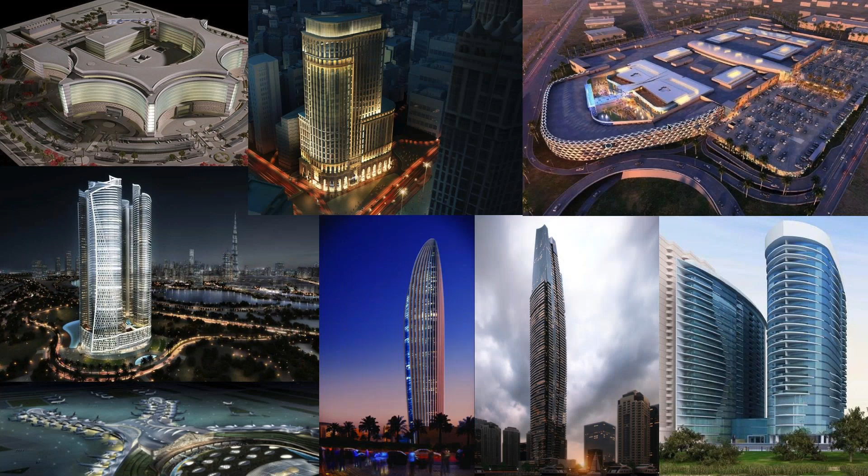As you know, us as a company, BIM Engineering Solutions, we are dedicated to BIM. We're also the distributors of ArchiCAD in the region. We do services and training and software, and we are based in basically 3 offices, 1 here in Dubai and 2 in Egypt, and we work with resellers in the region. With services, we basically work with developers, with contractors, and we do projects. These are some of the projects that we worked on as BIM service providers.

That includes usually, and mostly in ArchiCAD, architecture, structure, MEP, and ArchiCAD proves every time that it's really good for larger projects because it doesn't affect the speed. We can still manage these projects that you're seeing in maybe one file that we can run on a normal computer. So that is also one of the most powerful things about ArchiCAD.

This is another example of a mall. You see structure, MEP, and architecture. I usually like to show this example because many people think with ArchiCAD you can just manage to do architecture and structure, but you can actually do everything with ArchiCAD. So that's an example of a large project with MEP and so on.

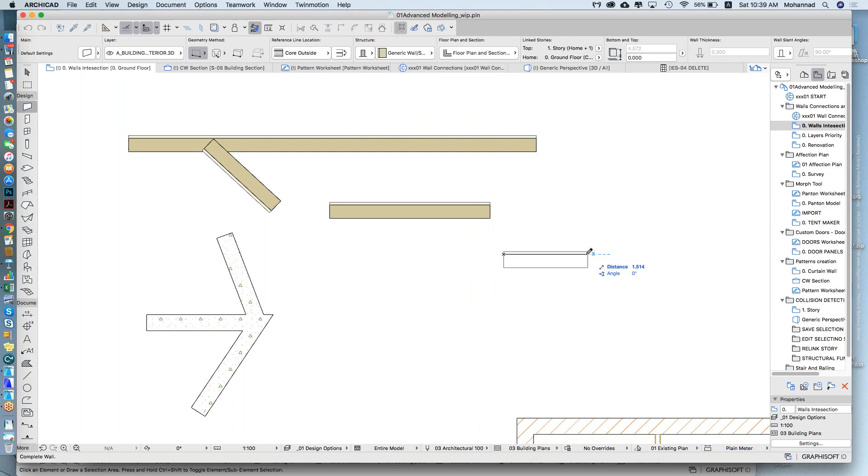So you can see that when I drew this, the reference line is actually at the outside surface of the core. But let's say if I draw another one, and in this case I would say center. So the center of the whole wall. Yeah, so it's actually drawing that at the center, or the inside face. So I can draw one inside face. And you see, after I draw them, they still have their reference line very clear, and that's how it interacts, and so on.

So if we look at this, for example, the reason this is not cleaning up is they're not basically connected. So let's say if I drag a copy here, and drag this here, you'll see that it cleans up. Now, one thing that is helpful, if you want to see them always, you can just go to View, On-Screen Options, and turn on the wall and beam reference lines. So you'll be able to see them and understand what's happening. These lines will not be printed. It's just on your screen. Yeah, so it helps understand.

One thing about editing also, before we carry on with the other parts of the walls. So let's say I have a wall, let's say it's a curved wall, doesn't matter now where the reference line is located, but let's say we have different walls. So let's say that's one, it's another one, whatever. One thing when you're editing is helpful: if you hold Command, or Control on Windows, you can start trimming the walls. So if you want to trim, just hold Control, you'll have this icon and just click.

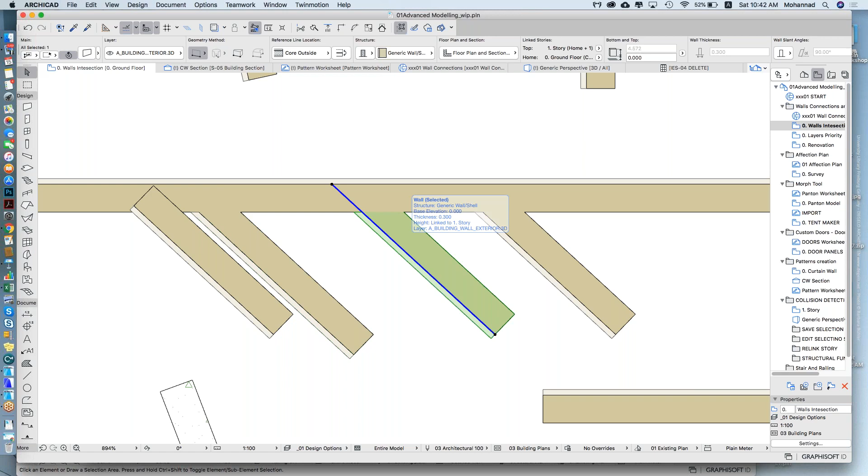For that, in Edit, you have something called Reference Line and Plane, and there is Modify Wall Reference Line. If I click on this, it will give me options to edit that, basically keeping the wall in place, or walls in this case. So for example, if I say I want the reference line to be in the center, or the inside face, or core, or whatever. So let's say center, you would notice that the lines shift. The wall is in the same position, it's just the reference line that shifts. And that is helpful when you're editing: if you have zones linked to it and you want to edit without moving it, you can use this.

Another thing about intersections. Let's say you see these three walls intersecting at the same point, and you notice that maybe this is not the intersection that you want. You want priority for this intersection over the three. You can control that. For example, if I select these two and go to settings, you will find under Model there's a Junction Order. The higher the order, the higher priority the connection has. So if I change the order of these two to, let's say, 10, you'll see that now the connection is changed, giving this intersection priority. Or if I select these two and do the same, these will have priority over the connection. So you can do this.

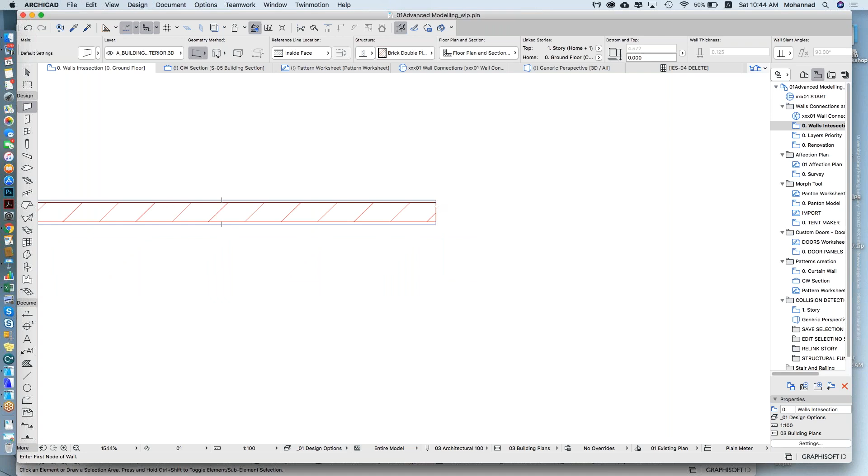Another small thing about walls, let's pick another wall type. Let's say this, a wall with plaster or something. I hope you know that if we're placing a window or a door, we can make these wrap, we can control the plasters. This is more for the documentation workshop, I'll show it more maybe in documentation. But if we have windows, we can control what elements are wrapped and the wall behavior. But usually I find users get a bit confused when we don't have anything. So we want it to end here, but we want the plaster to wrap.

There's a tool called Wall End Tool. You can just select it, and the default. So for example, if I select the wrapped end and just click it here, it will provide it, and you have options for the thickness of it and so on, and you can control it. And this tool is not only for wrapping, you can really do a lot with it.

So let's say if I draw another wall that has more like composite, smaller skins, and if I use the wall end tool and I use the returned end, here I can actually control how many skins to turn. So I just want 2. You can look at it here. So just 2 turns and so on. So we can actually control a lot of it. So it's also a helpful tool when it comes to walls.

Another thing that we face quite often is when we have hidden elements, but they're still affecting the plan. So this could be if we're doing options, if we're doing structural and architecture. So as an example, we have here 2 design options. So this is one, the small one, and then the second one is the large one. And I placed them in different layers. So I have option 1, option 2.

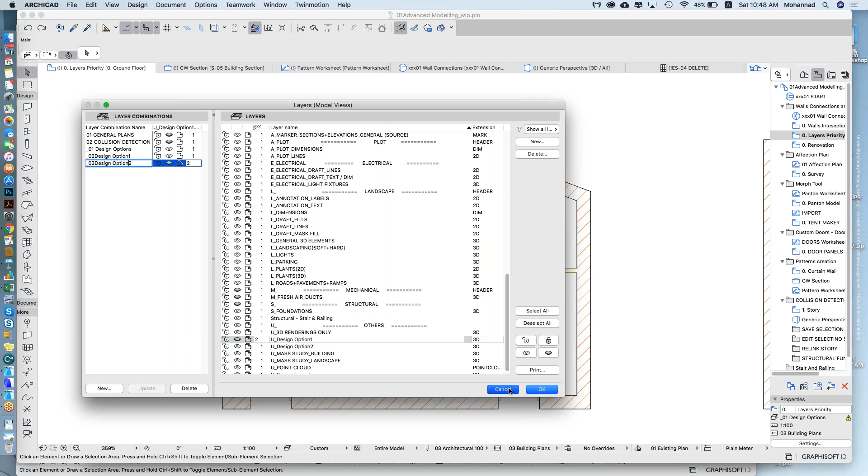So for example, I have 2 layer combinations here. So in this one, you can see that the number for option 2 is 2, and this is 1, and 1 is hidden and 1 is shown, while the other one flips it. So these are changing with the layer combination. So I can basically just go and select option 1, and then select option 2, and that works without any issues.

Another similar way of managing things, more focused on renovation, but you can also use it for design options: in ArchiCAD, by default, every element, when you open it under the renovation classification, has a status. So it's either existing, to be demolished, or new. You can also view them. There's a dedicated palette. You can open renovation here. So I can select any element and say, this is existing, this is to be demolished, for example.

Now, based on the status of the elements, we can use the renovation filters here. So what I'm looking at is the existing plan, which is usually existing elements and elements to be demolished. But then, for example, if I go to demolition plan, it will highlight the elements that are going to be demolished in a different color. You can see them.

And then if I switch to after demolition, basically the demolished elements will be gone. And then if we go to new construction, it will highlight all the activities, the new elements and the demolished elements. And then we can just go to planned status, which is basically the end game. So basically I can switch between what is existing and what is planned, and that doesn't interfere with your layer setup.

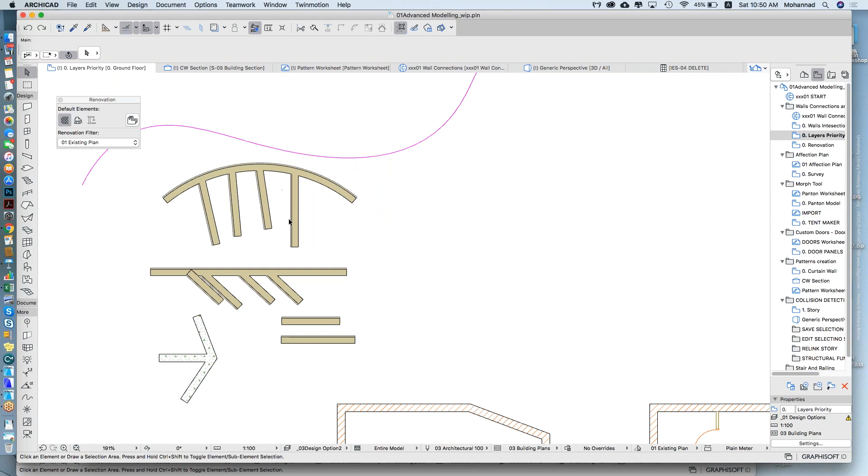Editing reference line, it's also there. Ah, you mean if we want to move the reference? Yeah, it's an edit reference line, and you have modify wall reference line. And one thing to note is that actually ArchiCAD understands the elements, right? So it understands what is core and what is finish. So when we are selecting, we can select that the reference line is just at the face of the core or face of the finish and so on. So we can do that too.

All right. The second topic that I will cover is dealing with affection plans. So we usually get the affection plans, and we have the coordinates of these points, and usually we draw them. So I'll show you a couple of ways of doing that, and maybe a more automated way. Because we are facing two issues: first of all, drawing it, and then that we want it to be at the zero of the project. We don't want it to be at those very far coordinates. So we'll see how we deal with this.

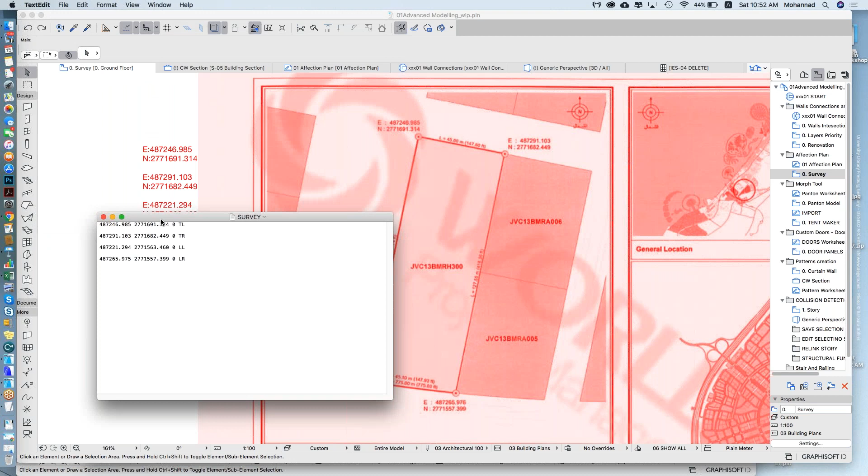So I'll start here, and say we have these points. I took the points from here and just wrote them here so I can see them. And as another example, say these are the same points, but we can start by typing them. I would suggest that we start with something basic like using the hotspot tool. The good thing about hotspot is that it's visible no matter how you zoom in or out, so you can always see it.

So we can start by typing this information in. Basically, I'm not moving anywhere. I'm just hitting X and start entering the east value. So for the first point, it's 487246.985. And then for Y, which you can hit Y or tab, that is 2771691.314. And once I'm done, I just hit enter. And we can check that point. If I zoom to fit, you can see it's very, very far, but that's fine. We will deal with that later. So that's the first point.

Then I'll enter the second point, again X 487291.103. I hope I don't miss something here. 2771682.449. So that is the second point. The third point is X 487221.294, and then 2771563.449, and then the last one is X

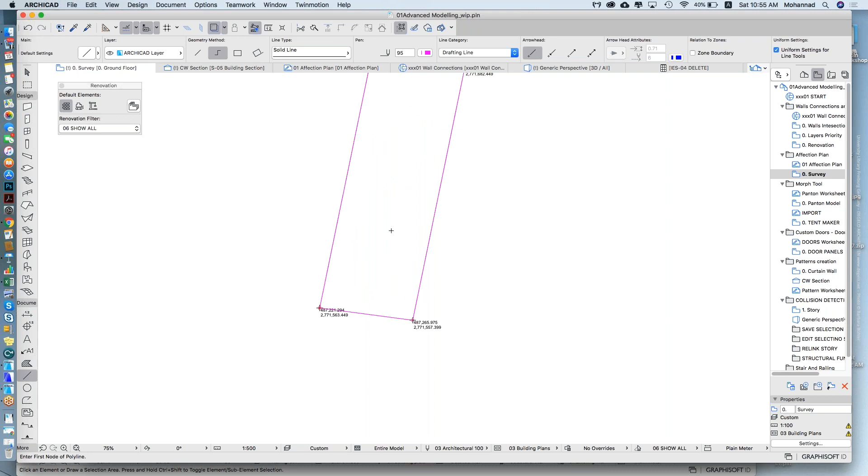One thing, because it might get confusing to know where to drag it, I usually do this. While I'm here, I pick the line tool, and again, I just enter X0, Y0, enter, and that will give me a line that's actually stretching from the origin to here. So it will be very easy to track. I can just select these here and drag them. And when I'm zooming out, it's very easy to find. That's really far. Okay, very easy to find where 0, 0 is.

So let's say I place this here. Okay, now let's delete this line. Now the problem that you face is that it is reading the actual coordinate because we moved them. So what we can do, we can delete them or keep them, it doesn't matter, but let's delete those coordinates. Now we know one thing for a fact, that we moved. Sorry, I closed the file.

So we know that we moved whatever shape we drew by this value, because this is the lower left point. So it was 4, 8, 7, whatever, and we moved the whole thing by this on the X axis, and this on the Y. So basically, we can say, take the readings and subtract this out of it. We're just telling ArchiCAD to measure whatever we have here, but consider that we moved it from that point. So what I can do is select this point here,

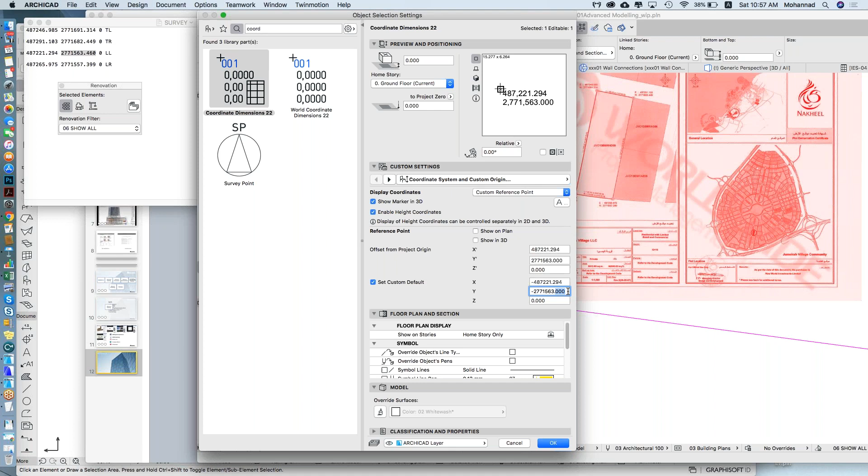Sorry, 63.460. So now this should read this value, and based on the amount that we shifted, we can start placing it on the other point, and it should read there. So this is the lower right point. I think I missed some point here, but I guess you get the concept that basically it's moving the whole thing by that value, and that reads correct. So that is one way.

Another way, yes. Why would you want to move it back to 0, 0 if it's already placed with the correct coordinates? Because actually it's an issue with all CAD software. When you place something very, very far from the origin, you would expect some issues. It could be elements not aligning, it could be a texture. So I wouldn't recommend that you place it there.

Because I would think if you're placing it with the correct coordinates, you can do things like global illumination and whatnot. You can do this too, because you can set the 0, 0 of the project to some coordinates. So for your 0, 0, you can say it's this city, these coordinates, and that is fine. But it's not recommended from the technical point of view to have something that far from the file origin.

The other way that I want to show you, so I'll just delete this. Now you see we have these points, right? We have to rotate it to have a 90-degree plot. No. Once you drag, you're just moving it on X and Y. The rotation has nothing to do with it, because you're rotating the whole measurement. But if you move it to 0, 0, then you need this part to be rotated and still have the correct coordinates in order to have a clear plot.

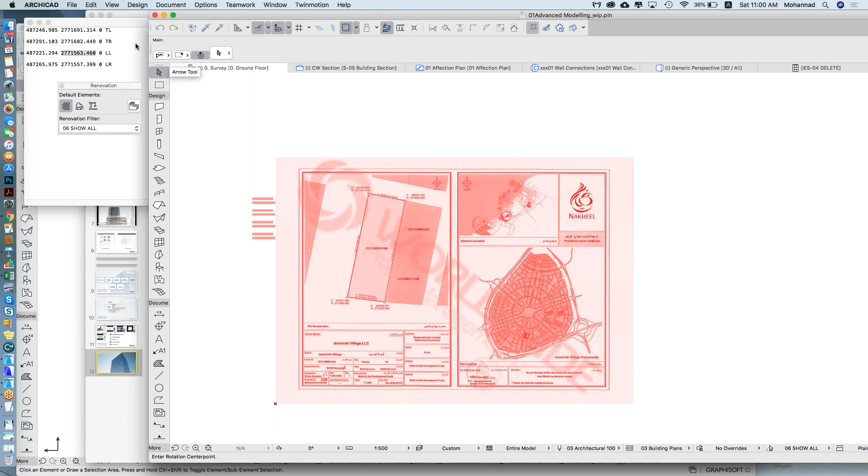But the other thing that you can use, because for example, when I did it, I think I mistyped a number, that's why we had a difference. So to eliminate that, you could use this method. Basically, open a TXT file and enter your points one by one: X space Y space Z. If you have Z, you can enter it also. And if you want a description for the point, you can also enter it, but it's not necessary. The most important is X space Y, then Z if you have it.

So you enter these points line by line, and then basically that's a normal TXT file. And then in ArchiCAD, I can just go to the option where it says place mesh from survey data. Now this is mainly used if you have information from a Total Station. They give you a file that has X, Y, and Z. You can use it, but we can also use it for these things to eliminate the risk of typing and then mistyping something.

So I can just go to this option that says place mesh from survey data, and I'll pick this TXT file. And then I select, for example, I want it to be placed in the original location, and I want to zoom to that new mesh, and that's it. That is actually created directly. So it just reads the points, creates the mesh, and places it. That is in the very far point that we're working on. And we can use this again, coordinates.

Let's say we go back to project origin, and these are the actual points, and we do the same thing. So I actually think this is a better way than entering them manually. You just put them in a TXT file and link it. Yeah, normal TXT, just open and edit. I think in Windows it's a TXT editor or something. You just open TXT, Notepad, exactly.

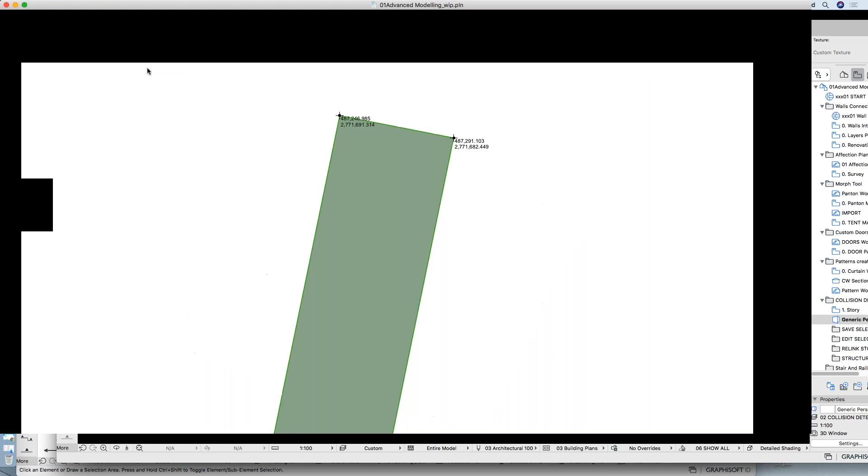So this is about surveys, how we place them, or plots, how we place them, how we drag them, and then we're still able to read the correct values even if they're not in that location. Are we okay?

Yeah, you draw that coordinate in the document, and then you can attach it to a place so that the coordinate is preserved. You're not moving it, but then the problem is if you're adding other points. And actually, not only that, it's when you place other points and you want to mark them up. So you want to mark up a point that is in your design with that value. You don't want it to be from 0, 0. So it's better actually to use this method.

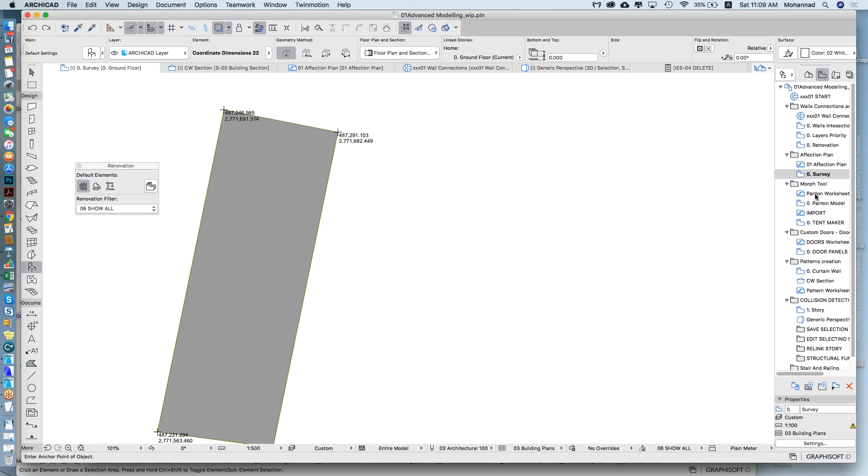Okay. We will talk now about using the Morph tool and some other general modeling tasks. We will start with using the Morph tool to create, let's say, something like furniture. The point is not about actually creating furniture. I just want to show you that you can do a lot with the Morph tool, that you can model freely. So I'll show you a few examples. One of them will be creating this Panton chair.

So I will do that using the Morph tool. I had a basic section, we will see it in a second. So I'll just pick the Morph tool here, and using Magic Wand, I will apply it here. And let's say I'll change the material to this red color. And I will just place this here, and let's have a look at it in 3D.

So I have this as a section, and using Morph I also drew a basic elevation of that chair. We will start with that. Let's say I'll place it maybe 1 centimeter below. And then clicking here, I will have the options. One of them is called tube, which allows me to go on a specific path. So I'll just follow the path of, sorry?

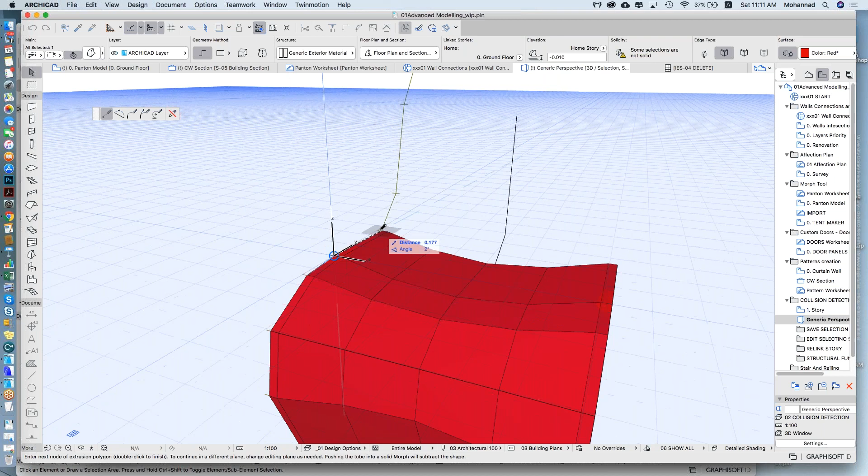Nah, it's a line. You can draw it in elevation. That's fine. But again, mainly what I'm trying to show is what options do you have with Morph? So I hope that is clear. Yeah, as you said, it's just something you draw in section maybe, or so on.

So let's say we started with the basic shape. And one thing about morphs is if I select, now it selects the whole morph, not the sub-elements. But let's say I want to select sub-elements. You always have this white arrow that allows us to select sub-elements, or it's Shift+Control, actually in both Mac or Windows. So let's say the points should be entirely in.

So I'll select these points here, and let's say I'll drag these points back. So using move command or drag, let's say I will align it with this point here. And again, we want to select these points here. So using the same thing, I'll just select poly selection, holding Control and Shift. Let's say we select these here.

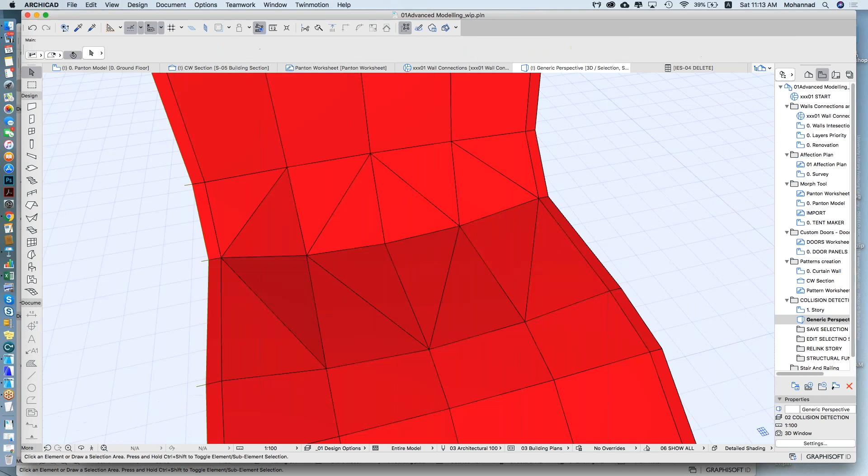And let's say we move it. Looks like I've selected an additional point, so let's remove that. And again, we drag it. Let's say I have a reference point here, so I'll just put it here. And again here, using the same thing, I'm holding down Control and Shift. So using that, drag it again. Let's say we align it here, and we'll do maybe the same to enhance it a little bit here, or actually the top one.

So basically what I'm trying to share here is that you can work with these sub-elements, which gives us quite freedom when we're working, and gives us different results. I'm not really very accurate on this. I'm just creating it as an example. So something like this. And then maybe the last selection is these points here. And I'm always keeping Shift and Control pressed, because I just want these sub-elements to be selected. So something like this.

You can also select surfaces. So in this case, I'll select this surface here, and then push them or drag them a little bit. And let's also select these. I think it's a bit thick, so let's select these edges, and also these. So always holding Shift and Control allows me to select only surfaces, not the whole thing. So we select these, and let's push it up a bit, so we make it a bit thinner.

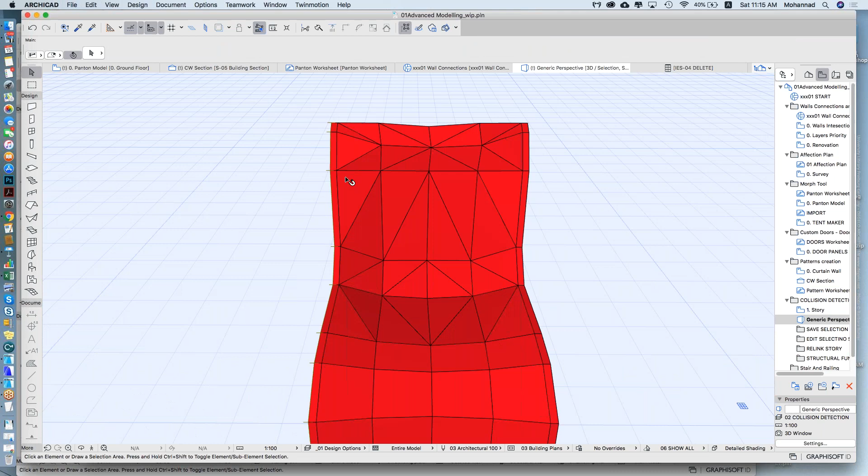Another thing that we can do, which I think is also cool, is if I select this whole row here. Selecting this, the morph allows us to go with this option. There is something called box stretch, and this allows us to work with these elements as one box. So I want to push from both sides, let's say I want this to be narrower here. So both of them go narrow. And let's switch to axonometric view so I can see it from the side easily.

So here, we also select this option. And again, we select all these points. Looks like we missed some, so let's do it again. Again, selecting the box stretch method, and I can just push it from both sides, up to here. And then maybe finally these points. And again, we can push it from both sides.

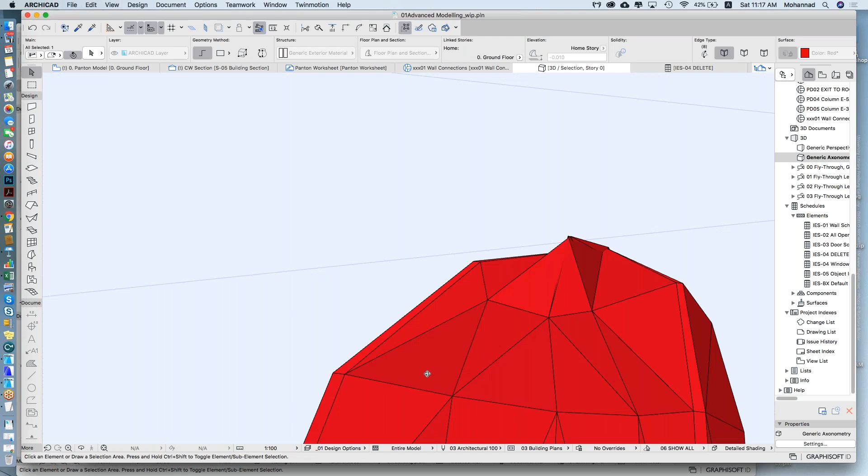And once we're done, we still have this edge that I want to adjust. I can just select this edge and pull it back if I want. I'm not going to be very accurate with it. So we can maybe just drag this back a little bit. You can still clean it up, but let's say we start with this. And then what I can do is I can select the whole morph.

Within design options, there is Modify Morph, and I can smooth that shape. So I can just go to Smooth, and smooth boundaries or keep boundaries, doesn't matter actually. And here you can control how smooth it is. Obviously, it will have more polygons, which we'll talk about in a second. But then you will have this as a shape, which is good for an object, as a chair. And now we will see how we save it as an object and how we detail that.

Because one cool thing about ArchiCAD is, so we have this. I'll drag a copy of it. So we will see how we create an object first. So we have this. I'll open it in 3D. And basically, I just have to select it and then go to File.

And then I go to Save Selection, and I'll save it as an object. Yeah, so I'll just save that as an object. Okay, and we will call it AC Panton, let's say. Now, this is saved as an object. If you want more details, you can specify what kind of object and so on, but that's fine. We'll just go with the basic saving. So we'll save an object.

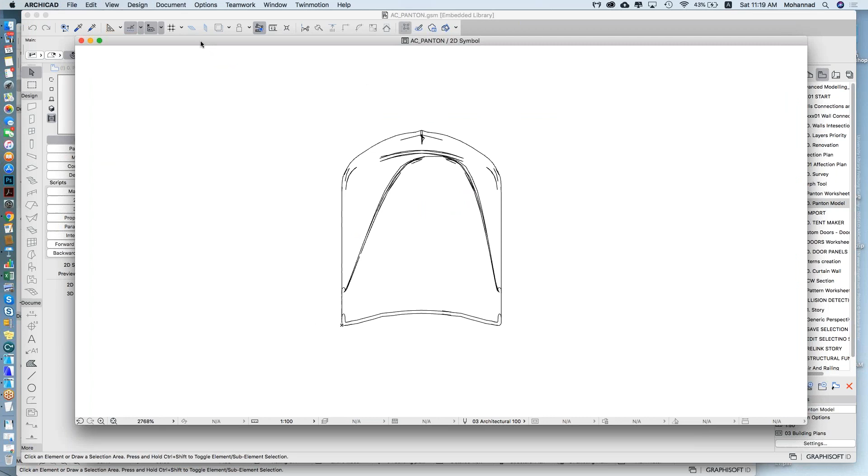So if I open that object, it will open the dialog actually of the object. So we're not going into the script or something. What we're going to focus on is the 2D symbol. So there is an option where you click on 2D symbol, and actually it will open the 2D symbol for us. And in this, we can actually start. So if I want it to be simplified, I don't want it to be exactly a projection, I can start actually drawing something here.

Let's say we just highlight the outside box of it. So we start with that, yeah. And then let's say I know that I want this to be up to here. Maybe I'll delete this and mirror. So this is pure 2D work, yeah? So we're working on it as if it's a 2D element. And then I can start adjusting it.

So I want this line to be curved here. I want these to be curved here, same as here. And then maybe I want these to have some sort of curve. And the same here. Sorry. And then maybe this line also curved a little bit. And then I want to delete the old ones. I use a different pen assignment, so it's very easy to select them. So I can just select all types using that pen.

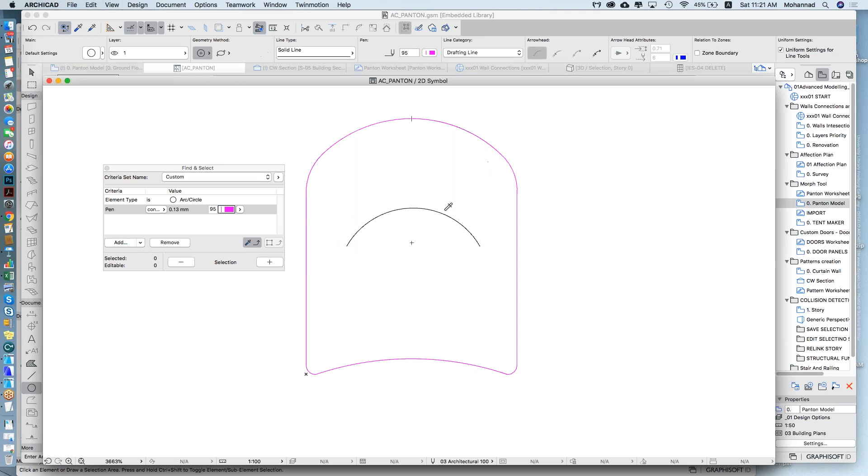So I'll select those, the old ones, and you see it has so many polygons or so many dots. So maybe you don't want that, and maybe I just want to add a symbolic line here that just shows the curve. So let's say this. And maybe I will add also a hatch. So we were able to select it like the normal object. So I'll just select a cover hatch and, let's say, background fill, and then I'll just do it like that.

The other thing that may be worth mentioning is that when I select, you see there are only 4 points to select it. So if I want more, I can go to, again, editing and use hotspots. I can put any point that I want to be considered. So let's say I want these points. I think I'm overdoing it, but just to show what options we have. So let's say these points. And so that's it. I'll just close this.

One more thing, maybe you want to add also a preview picture. So I can click on preview picture. By default, there is nothing. If you want, let's say I open this image here, copy. So I highlighted the part, copy and paste. So that will be part of my object. So now if I close the object, it'll ask me to save it, and I say yes, save it. And now I have a cool object to use that has an image and has these points and so on.

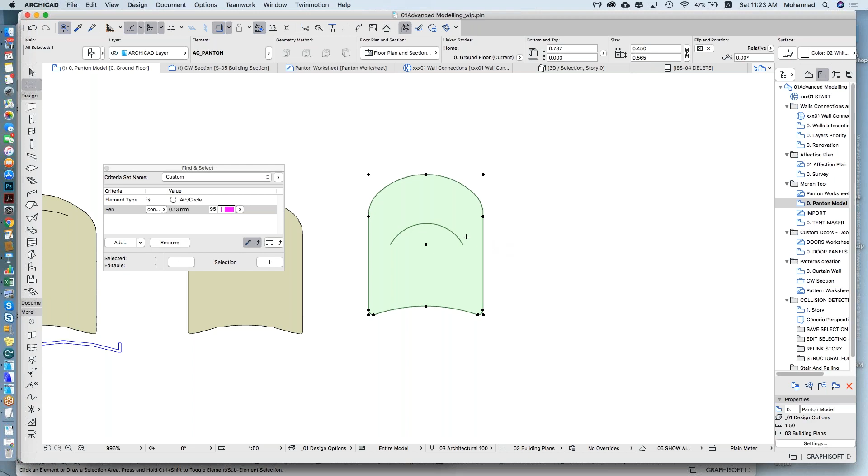Now, the other thing that I want to talk about here is importing from other formats. So actually, ArchiCAD is really, really good with importing these. So we will see the same object from different formats that I have downloaded online.

So we will start, sorry. I have them in this folder. We will start with the SketchUp. So I downloaded this, I think, from Warehouse, Google Warehouse. So with SketchUp, it's very easy. You can just drag and drop, and it will create a GDL object.

And yeah, remember one thing, that the objects that we import, we can also edit their symbols. So if you're not happy with the 2D symbol, we do the same thing that we did, or change the image or something. So that is actually the object from SketchUp. Sorry. Okay, so that is one from SketchUp.

Let's see one that is, where is it? RFA. So from Revit library, you can also do that. You need to install, I'll mention those in a second, but you can import an RFA as GDL object. So I'll just pick that and open it. And again, here you can control how smooth the geometry is. So I'll keep it at the middle.

And that will again convert it to an object. And you see that it takes time, like, I don't know, a few seconds. But once it's saved, it's a GDL object. So it doesn't matter what was the source. Once it's saved, it's saved. And then after that, here it says it's saved, and it is part of the library, so I can just place it.

So here you go. And then the last one we will try today is a 3ds file. And I found those online, by the way. It's not something that I created. For 3D Studio, you can import 3ds as GDL object. And you can import also DWG if you have a block. You can import from Rhino also. So let's save it as it is from 3ds.

But I didn't check the scale, so let's just double check the scale of this file. Okay, it's saved. Oh yeah, it's massive, so let's just make it 45 centimeters. So now we have actually chairs, same chair, from different formats. I really like this one; looks cool. So you import them, and you can enhance their 2D symbol if you want, because in many cases you import something, you're not happy with the 2D symbol, you want it simplified.

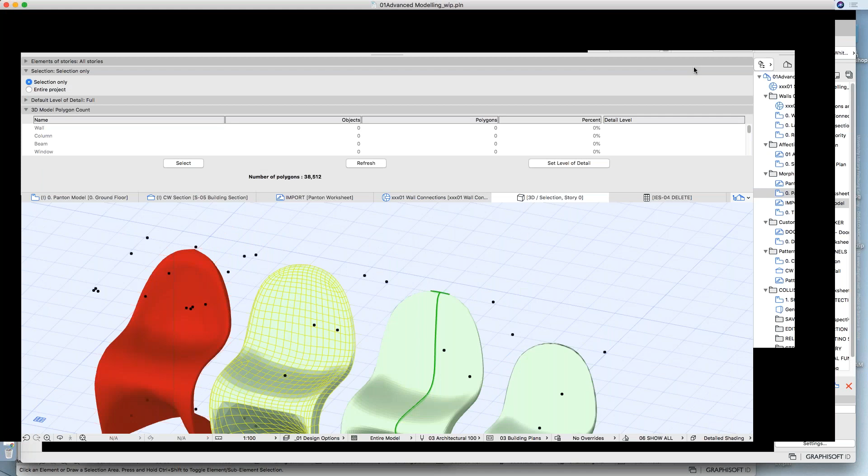So once we start it, let's say we don't want the whole entire project. I just want it for the selection. So I just want to compare these 4 objects. So I'll just refresh it. So here it says, based on the selection, 100% of them are objects. We'll see that in a second. So it shows here by polygons.

So this is the RFA one, the one that we imported from Revit. It has 23,000 polygons. It's quite high. The one that we have created is 8,000. And then the 3ds is 3,000, and the SketchUp one is almost the same. So you can see it's a huge difference between them. So you should consider this also. So let's actually run it for the whole project.

And the file has a project in it. So I'll just show you the project first. It's a demo project. Yeah, ignore this for a second. I think we have something. We still have something very far, huh?

Okay, so basically the project is this, so let's just focus on it. So this is the project, and we will run now the poly count for the entire project just to see, because it's very common. So I'll just refresh this.

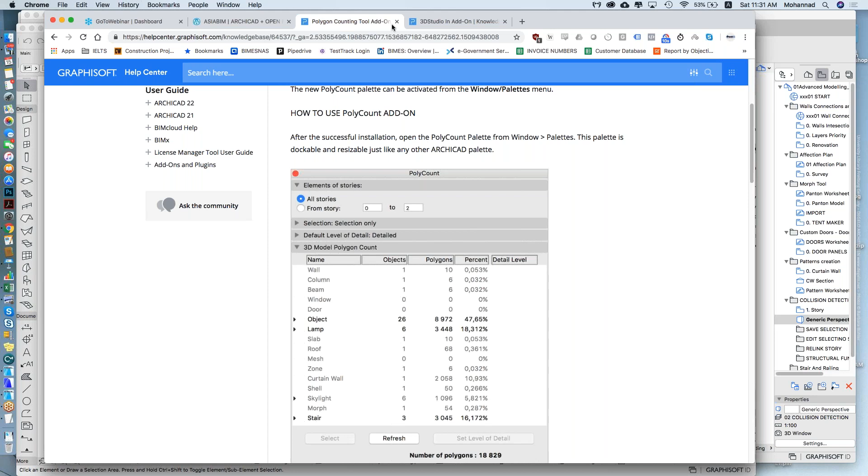You have a list of it here, so you can read about them. So for example, importing 3ds is also not there by default. So here you can read about it, how to import, what settings you can control. And we were talking about Polycount. So again, if you click on it, it explains how to install it, where to find it, how it works, and so on. And this is a free add-on, so I would encourage you definitely to download it. Let's see if it's finished. Almost finished.

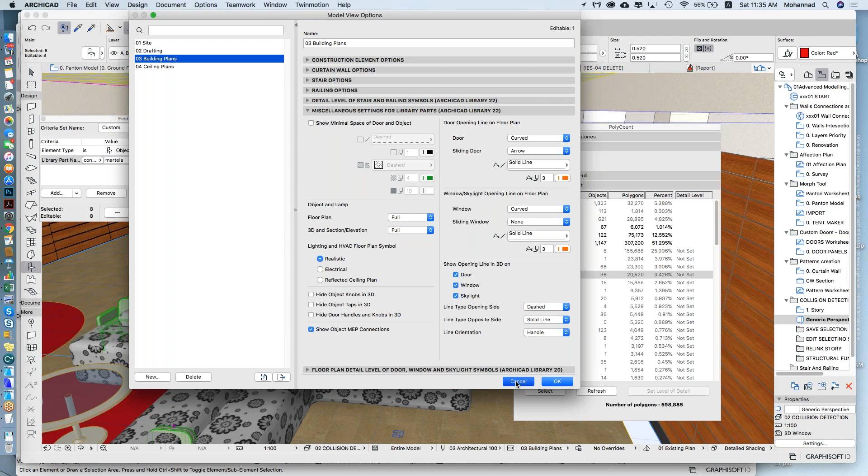I think that's it before the break. If you have any questions before we have a... yes.

The one which you used for the chair, it was in the same plane in elevation. You see, the profile was in the same plane. What if we have it in 3D? I didn't get it, sorry. The profile that you used to make the chair was in the same elevation and plane, right? It was in one plane. Right. For example, if we have the profile in a 3D plane, can we use that to produce our MEP sections? For example, we have an MEP file and a plumbing file.

We use that profile. But you use MEP actually. I mean, the MEP tools have this. But that would be faster, isn't it? If we have every single line and we connect it to a profile, generate it faster. No. But to answer your question, yes, because that is not related to one plane. You can move the lines in. And we will do a bit of it actually after this.

Or do you want to? I still actually have maybe another 10 minutes to show related to profile. Do you want to break, or should we do it and then have a long break? I don't know, which one do you want? By hands, break now or after 5-10 minutes? After. So everyone is fine with the 5 minutes. Okay, so let's show. Then maybe I can cover this, because you can do these things.

So the next point that I'll show you is again mostly working with morphs. One of the things is that in morphs we can start drawing, let's say, by lines. So let's say I'll place something basic like a line here, and I'll drag a couple of copies. Let's say this, and then I'll select these. I'll go to 3D, and using these lines, I can start editing them.

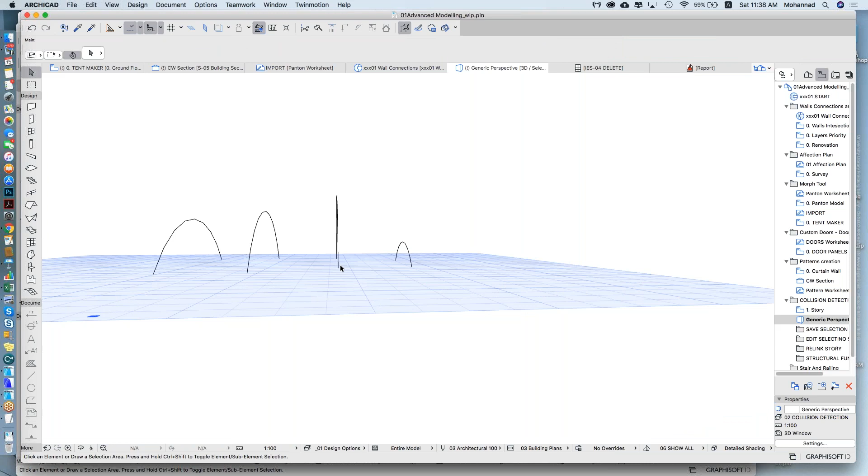And let's say I will push this in a little bit. And maybe we want to rotate this. So I can select this and select rotate. And let's say we go vertical. So let's say we want to rotate this a bit. So I think that shows that it's not one direction. And let's say we have these, and let's go back to the plan and try to connect them also with other morph lines.

So a simple one here, maybe we break it here, maybe a curve. It really doesn't matter. You can do any shape, but I'm just trying to do something very quickly. Let's say this here, and then finally this here. Let's check in 3D that they're actually connected. So here it is not. So I can select this point and just drag it up here. Same with this. Or if I want this curve also to be curved down, I can just go. So whatever I want.

Now, the cool thing is I can start selecting them. So I can select these, right click, there's a Boolean operation, and then I use union. So it will become one element. And then in Design, in Modify Morph, there is an option, Cover with Faces. So it will cover that with whatever we want.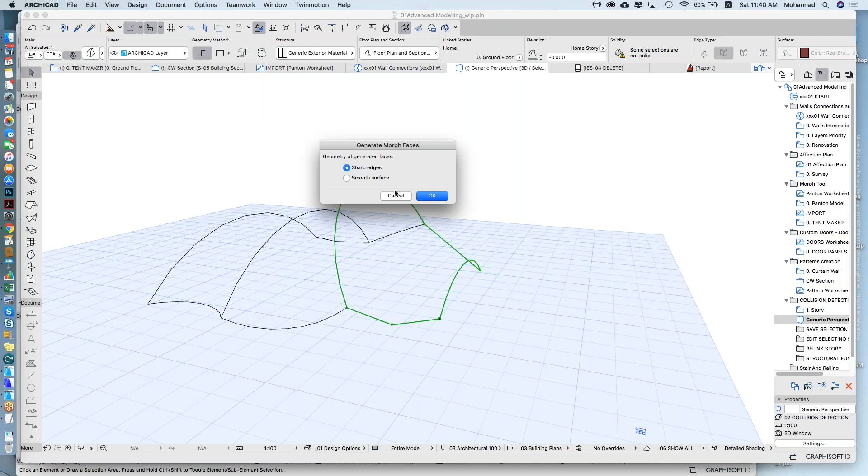And then the same. Let's say I'll carry on with this. So I'll select these here again, union, select it, Design, Cover with Faces, and so on. So you can see that you can actually do quite a lot with this. And once that is created, so again, Design, Modify Morph, Cover with Faces. Once that is created, you can convert it to one big morph.

So I can just go and union this. So it's one that you can do whatever you want to it as a morph. So I can just do some crazy irrelevant shape. And you can control how smooth that is. If you remember, we showed how we smooth it and so on. And once you have this, you can use solid element operations with other elements.

So let's assume we have this here, and let's draw maybe a wall. Let's say this is a 30 centimeter wall. Let's draw a simple one. So here, and then I'll multiply it, let's say, every 60. And then if I open this in 3D, those are really high, so I can select them all and maybe drag them a little bit.

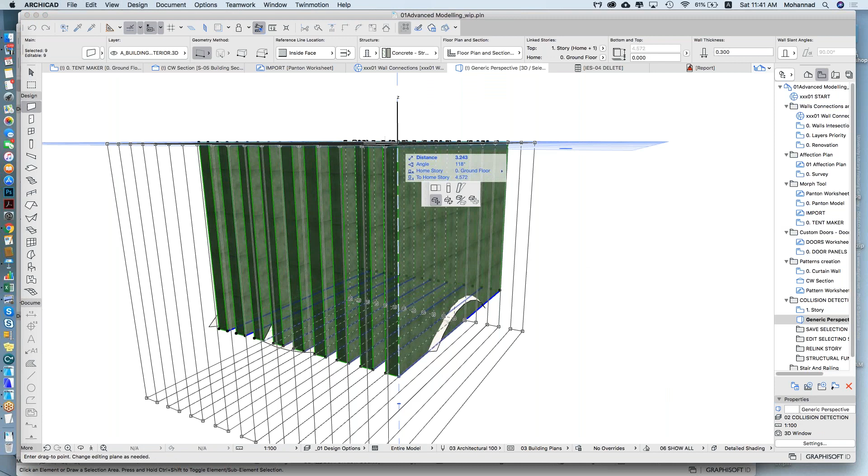Okay, and then using solid element operations, I can select all the walls and use connect solid element operations. Let's say the walls are the target in this case, and the morph is the operator. And then we'll subtract below, so we can go with down extrusion, execute, and then you can see the walls now take whatever shapes based on that.

Or we can do the other. So if we wanted this shell to be just a grid, we add elements and we subtract them from it, so we'll end up with actually just a grid.

Another really, really good object. It's a very old object. I'm not sure, maybe Georgia, Tent Maker, do you know who created it? Yeah, it's an old object that is available online, but it's a really good object for these tasks also. So it's called Tent Maker. You can just download it, just Google it. I can email it to you. It's free as far as I know. There is no limitation on using it.

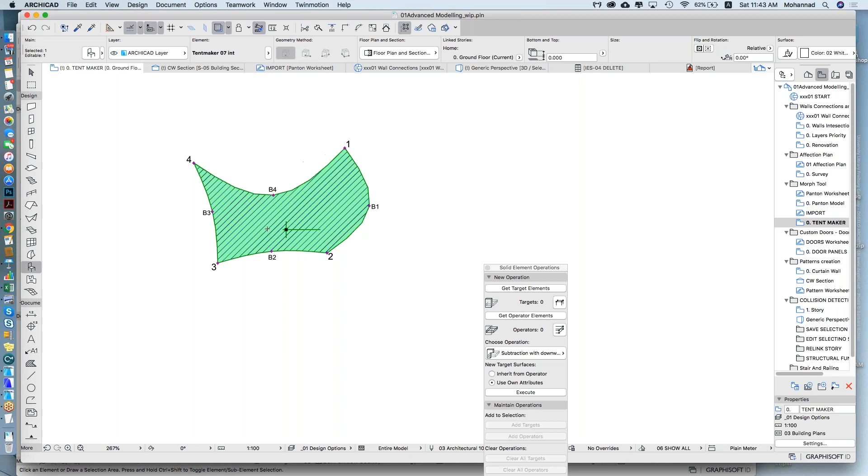And if I open this, basically with Tent Maker, I have the option to go with 3 points or 4 points. So start with 4 points. You can adjust how it looks in the plan. So let's say I want this here, I want this here, I want this curve to look like this. And then in 3D, you can start working on the points one by one. So I want to move this up a little bit. I want this here and this curve to be up.

So you can create, and you can control how smooth it is. So let's say I want it to be smoother, so I'll add points to it. Now it's quite smooth. And let's say I will add another copy of it. And this will be 3 points only, so I can just switch to 3 points. And I will match the curve in the plan.

Yeah, and then again in 3D, I can just match the points. So this is here. This is up towards here, and so on. And again, you can use solid element operations with them. I think it's a really good object when we have shapes that we just want to deal with points.

And you can turn off this marker here at the lower part. You can just say, I don't want to see the origin. And you can turn it into a morph also if you want and work on it. So I really encourage you, if you're into this kind of roofs, this is a really good object.

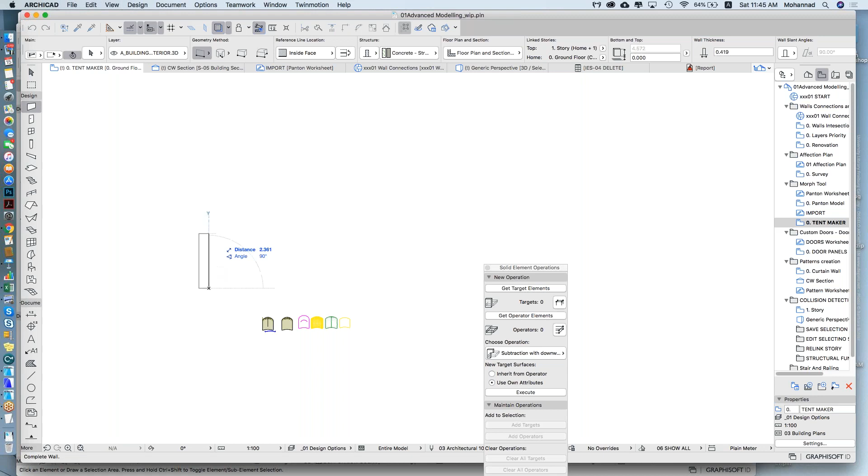The last thing I want to cover is the shell. The shell tool has some really cool features. So let's start with a basic couple of walls. I just placed those so I can use them as a reference in my 3D easily.

So just go to 3D, and then with the shell tool, there's an option called the ruled shell, and we can go to detail. This allows me to draw basically two curves or two shapes and connect them. So let's say I'll start on this surface, and I'll draw a basic curve, but it could be anything. So let's say a curve up, and then done with it, and then select the second surface.

And you can see I already have this line that allows me to draw any curve. So you see it curves the other way, and once it's done, I actually have this shell with whatever we've created, and we can still edit it, and we can assign profiles to it. And this is not only horizontal.

I mean, I can rotate this easily, so we can just go and rotate this vertical, so we can work on it as a vertical element. Or let me just show you actually if we create a closed one, let's say in the plan. So I can just go, sorry. So let's go with this on the plan actually.

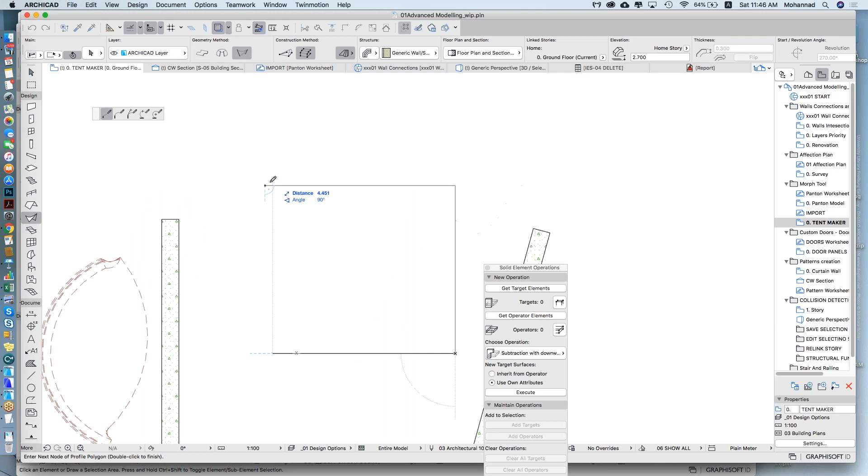So I'll draw maybe a basic box as a bottom, and then it'll ask me the height. Let's say it's 8 meters, and then I start drawing the top part. So let's say the top part is a curve, then, I don't know, straight bits. And if I select this, go to 3D, so I have the shape.

Now what I can do with it is if I click here, for example, it gives me the option to, let's say, stretch it up a little bit, or move the upper projection here, so I can just move it here. If I want to edit this, so I want this edge now to be curved.

See, whatever we do. Or I don't want it to be actually on this plane, I want it to be a little bit more rotated. So we can do this, and whatever we do here, let's just move it a little bit, and I'll change the settings of this to be projected only, and then I can actually start seeing.

So I'm moving in floors, and you see, for example, per floor how it looks and so on. So that's also a good tool when you have shapes that are not very regular. You can also utilize it. Actually, that's it for before the break. If you have any questions.

This one you have shown us is on... No, that was. Oh, it's very old, actually. Tent Maker is very old, but the shell, I think it was... No, it's very old. Shell? No, before. I think 14 or something. I cannot recall, but it's quite old. Maybe 16.

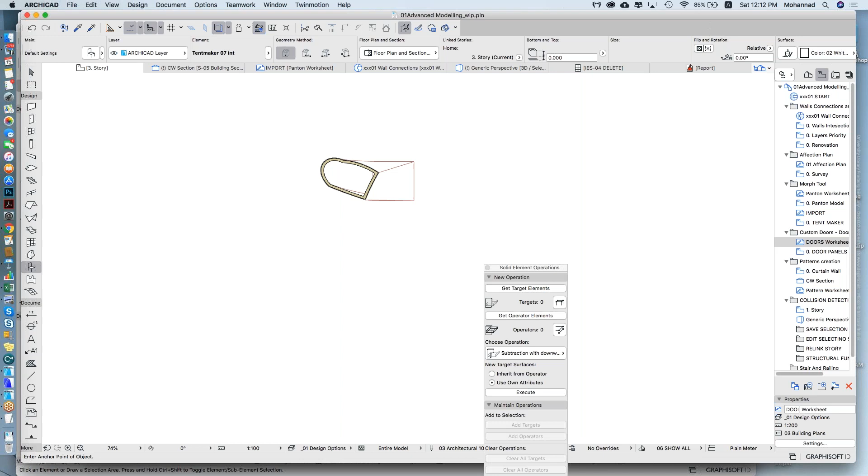Okay, so we'll start with creating custom doors and windows. The example that I will show is about doors, but that's applicable to doors, windows, curtain wall panels, all of these. Now, in many cases, people ask if they want to create custom doors. In my experience, most of the time we're talking about creating a custom panel, not a custom door. ArchiCAD comes with a very rich library, so you have many types of doors and windows that are customizable, and in most cases what we're looking at is just a panel to be applied.

So here is an example where we have different types of doors, and then we create a panel and just assign it to a door. Versus creating a custom door, which means you create a door from scratch. That's very rare unless you have a very weird shape; the vast majority of times you're just creating a custom panel. So we will cover both of these scenarios now quickly.

So let's say we want to create a custom door panel. We can start with lines. I'll just create a basic one, 90 by 2.2 meters, whatever. It will adjust to the door, so you just need a basic proportion, not necessarily the accurate one. Then we can use any tool to get the model in 3D. We can import, we can use morph, slabs.

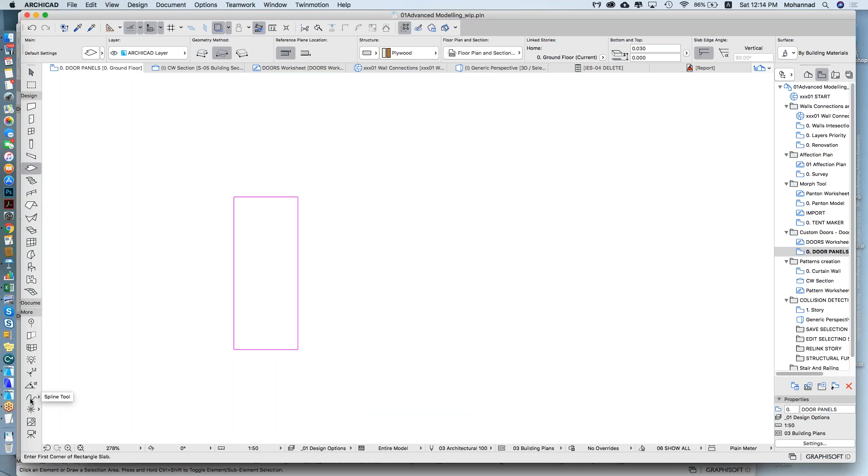For example, I'll go with a basic slab. I'll go to slabs, get a wooden slab, say 3 centimeters, and place it at 0, using the magic wand. So I have this slab here. Now let's say we also have a shaped glass opening in it that looks like this. I'll select the slab, select the slab tool, and again using the magic wand, just click, and we have that subtract.

Now one thing before we carry on: you see here the number of points. Since we were talking about polygons, this is related to the magic wand settings. You can always check the magic wand settings and control how small the divisions are when tracing. Here I'll make it a little bigger, 8. It allows a deviation from the curve of 8 millimeters or so. So you can control that.

If I create it again, you see there are fewer points. So that's something for you to know, that it also helps control polygons and all of these issues. And let's add maybe glass to it.

So let's say glass, and let's say glass is half, so 5 millimeters. And I will apply it here. So now if I check it in 3D, and let's say I'll place the glass a little bit inside, so let's say somewhere here. And again, it's not only 2D. We can have 3D elements popping out, it doesn't matter, as long as we model something in 3D.

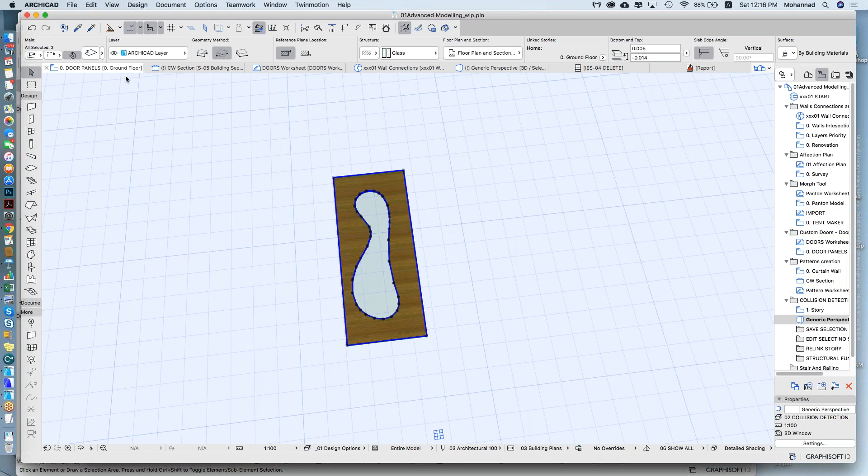Okay, now going back to the plan, we'll just place a wall. And maybe we'll place the different door types. So if I go to the standard library, let's pick different types of doors. So this is one. Let's say one with a double side, with side lights. Let's say we'll take maybe a pocket door, and maybe a folding door. So a few different types.

Now, if I go to 3D, and I hope you're all familiar with the options that we have with doors, they're very powerful in terms of what we can achieve with them. And one of the things is they're all actual interactive doors. So if this is a sliding, you slide and all of these things. But let's put them back.

Actually, if I select this now, in their settings usually there's a door leaf option. So let's say if I go to door leaf and I'll select horizontal vertical grid, you'll find that even with that you will have options. So I want this to be thicker on the lower part, I want a different number of grids. We can customize all of this. But then always we have an option that says custom.

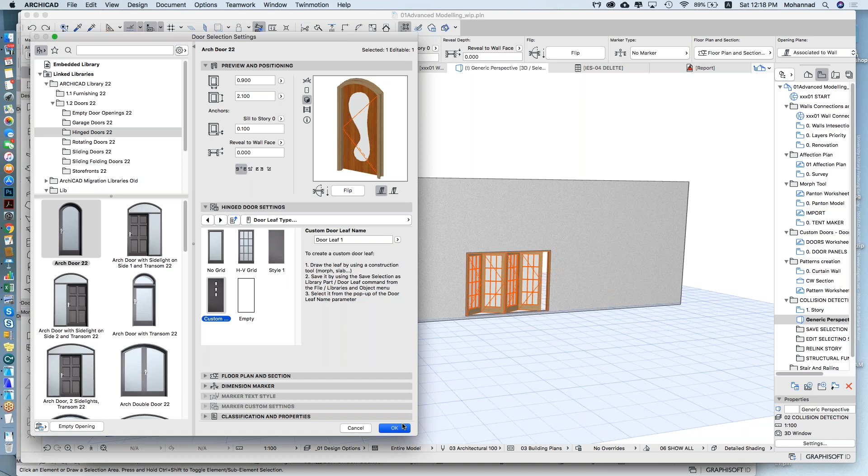So when I select custom, it will show me a list of the ones that we've saved as custom door panels. And then I can assign it to that door, and it's still a functioning door, and we can stretch it. It's just a door with whatever shape as a panel. And that applies to all door types. So I can select all of these, go to custom, select the example that we've created, and that's pretty much it.

I showed you for doors, but it works for handles, windows, curtain wall panels, kitchen cabinet doors. All of these have custom, where we can just model something, save it, and it is part of this. So we're not creating a new object from scratch. We're just enhancing what we have. So I think that's a good thing to use.

On the other hand, if we want to create a new door, let's say we have a shape of a door that is irregular, whatever shape. In that case, we need to create a new door. So let's say we will have a shape that looks like, let's say it's an opening. So this is the lower line, and then that is the opening. Now, I would hate you as an architect if you create anything like that, but let's assume that is the door.

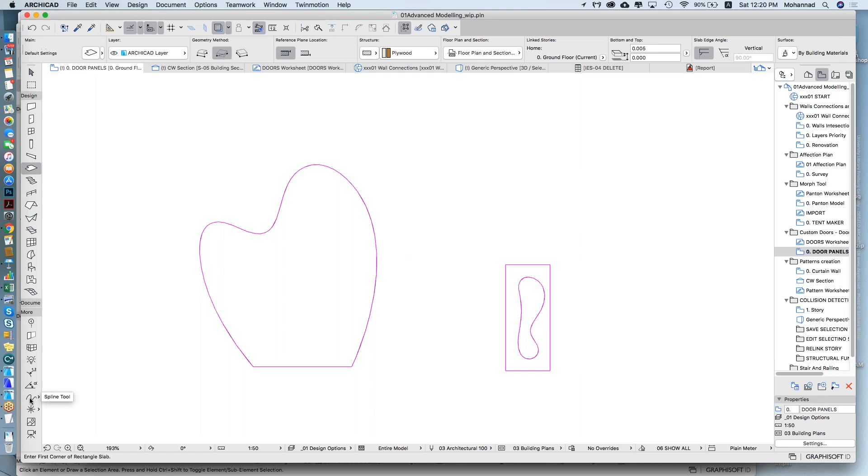Sorry. Again, slab, create this, and then let's say we place glass. So we have this. So let's say that's how the door looks like, or the opening, or whatever. Now I will save it actually with a mistake, so we can see the mistake, and then we see how to deal with it. So let's say I've created this, and then here I will save it in libraries and objects, and I'll save it as a door. So we didn't save it as a door leaf this time. It's actually a door, and we call it whatever, new door.

Okay. Now the problem with this is when we created it. So let's say we have this wall here, and let's say we pick door tool, and that is the new door that we just created. And now if we look at it in 3D, the problem is that the opening is not actually following the shape. It's like a full rectangle. So when you're creating an irregular shape, you just need to add one more step that actually tells ArchiCAD where is the boundary of the opening.

So when I've created this, basically I can just add a new slab, or any shape actually doesn't matter, but covering the outline of what I want. So now if I go here, I have added this big slab that is outlining also, and it has other parts, and it doesn't matter what material we are using.

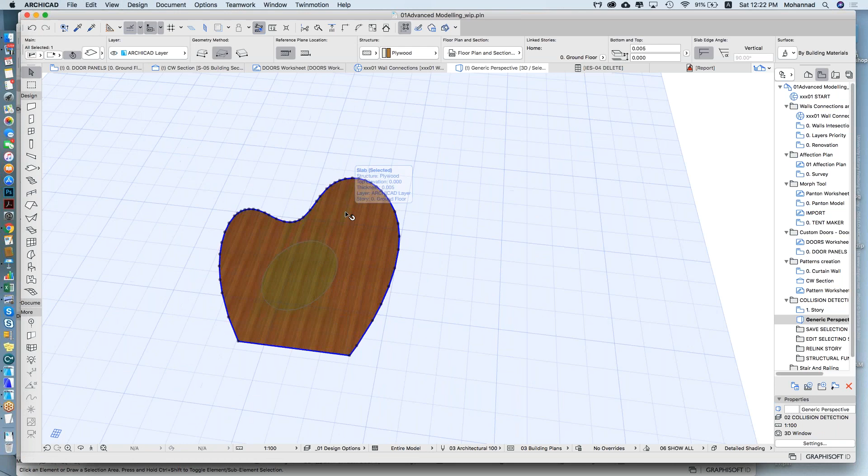The one thing that you need to know is that in the ID, for this specific slab that is outlining the shape of it, the ID of it should be wall hole. Okay, that works as a command that when we're saving it, as long as it says wall hole, it knows that when we insert it, it will follow this shape. So for example, if I just want an opening with no door, I will just add that slab and call it wall hole and then use it.

So now again, I will save it again. So file, libraries and objects, and I'll save it again as a door, and we call it door 2. And now when we place it, it should be fine. So I'll just place it next to the previous one. Sorry. So this should be fine. It cuts through the wall properly, and if we adjust it and so on, it works just fine.

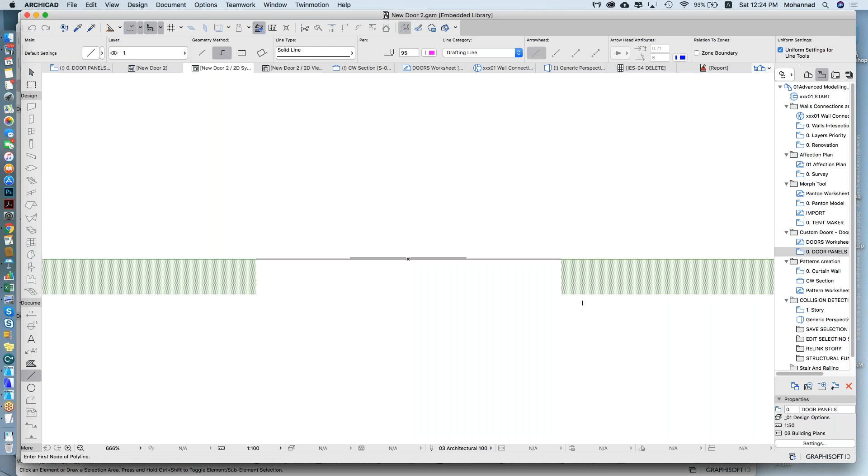Now, again, enhancing it. So let's say I'm not happy with the representation. It's an object like any other object, like what we did earlier with the object. So I can just go to opening the object here, and I can just go to 2D symbol, and basically draw. If I want it to be represented in a specific way, I'll just draw something very basic. I'll just draw a line, as if the whole thing is a door. Again, it doesn't make sense, but just for showing an example, and then I'll delete, let's say, these here.

Okay, so let's say this, or whatever you detail there, and that's pretty much it. You save it, and you have that as part of your door. And it's a door. It doesn't have all the intelligence of all the other doors, but you can have tags, you can have whatever you want. So that is mainly the difference between creating a custom panel that works for doors, windows, curtain walls, and so many other options. Everything custom you find is usually a custom panel that we apply. But then we can create also custom doors, like in this example.

I will move to another topic. So do you have any questions about this? Yes? So this custom door that we created, can it be open or just flat? No, if you want to add that sort of intelligence to it, you actually need to script it. So that's why I encourage you in these cases to think of actually using the standard doors, because standard doors have a lot of options that you can customize to reach a combination.

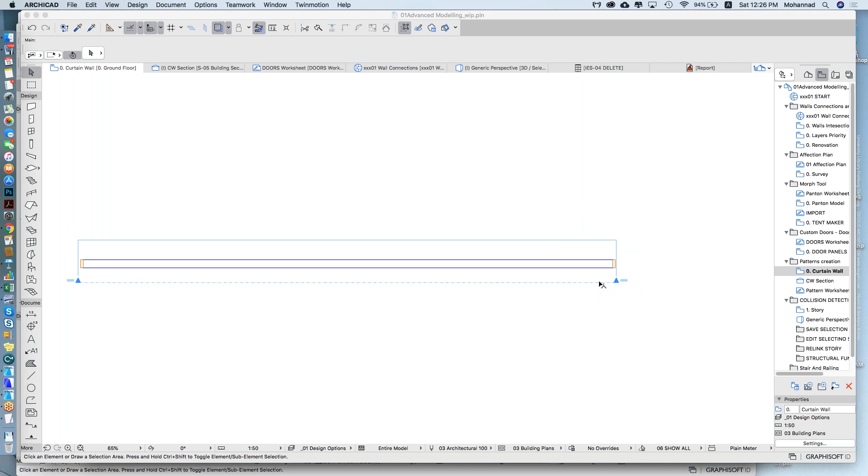So what I have is an empty curtain wall, and I have this as just a trace reference. And I can start with edit. I can start applying the frames. So I'll just start with this here. Let's say we created this, and I'll select these frames and then rotate them. So just say rotate, and let's say we will have 11 copies, because I know this has 12.

Okay, so you have these frames. Then let's just add, I think we can just do half of it. So I'm just adding these frames. I'm tracing, drawing, and obviously for that you need to have a tileable pattern that could be repeated, yeah? So you always look at that pattern when you're creating it. That's something that could be repeated.

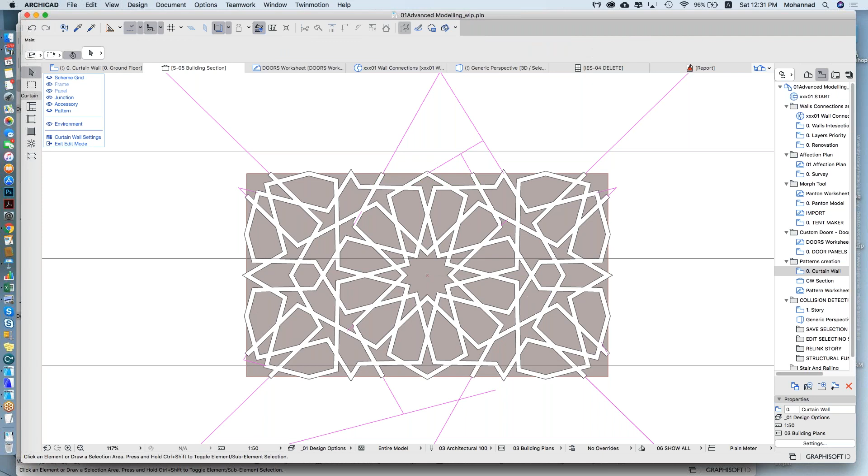And we'll turn off this, or we can keep it. And you know, in 22, we have this option that we can look at the pattern, and we can start adjusting the pattern edges. So I can just say this is up to here, and the pattern should be again here, and then from top, and you can see feedback of what you're doing. And then apply. Now obviously creating it with curtain wall has so many advantages because we can apply windows and different panels and so on to it.

So if I go to 3D, I'll have this, and then if I want to change something in the settings, I want this to be a window or glass or something, we can do this. But this has so many polygons. Now, in many cases, if it's just a decoration, just a screen, maybe you don't want to create a 3D object out of it, but you want it to look fine in 3D and in elevations, but you don't want to do the whole thing. So this is the first option that we talked about.

Now, the second option is actually using images. So for that, we will use this image, for example. Basically we have to utilize something called the alpha channel. In images, we have channels. We have for colors, RGB, and then there is an alpha channel, which allows the computer to know which parts to be transparent and which part to be solid. So I'll show you that. I'll switch to Photoshop, just to show you how to prepare that image.

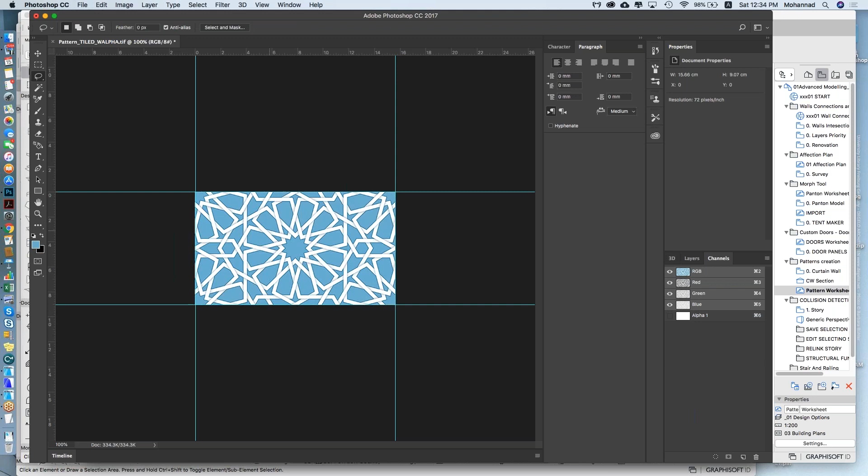Basically, the alpha channel has black and white. Whatever is black will be transparent, and whatever is white will be basically solid. So here I'm working on the alpha channel. I'll paint it all white, and then I'll turn on the other channels, and basically what I will do is select the areas where I want it to be transparent. So I'll just say by color range, select the blue. You can be very accurate about it, but I'm just showing a quick example.

And now in the alpha channel, these parts should be black, which means that these parts will be transparent in that image. So the image will be this, but everything in the alpha channel that is black will be transparent. So that's the image, and I will save it.

You need to save it in a format that actually carries the alpha channels. So for example, in this case, TIF or TIFF. PNG carries it. I think we have TIFF and PNG and PSD. As long as ArchiCAD reads it and has alpha channels, we're okay. So I'll just go with that. So delete 3, let's say.

And now in ArchiCAD, and by the way, that's very common in images. It's not like you always have to create it. It's very common when you're downloading textures that they actually have alpha channels. So now we go to surfaces. Let's say I have this material here, and I'll create a new one. I'll just call it delete 1 or something.

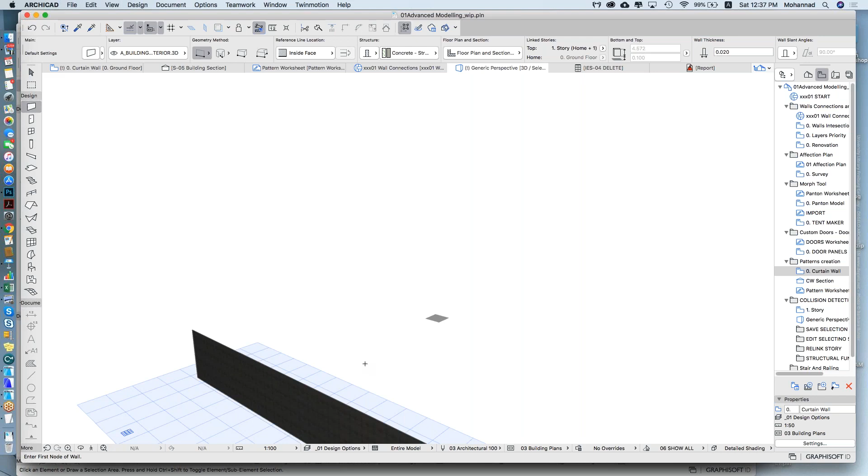So that is a texture that we call delete 1. We can give it a color if you want that reflects something, let's say blue. And now, basically, if I draw a wall that is very thin, 2 centimeters or something, for this wall I will use this surface. So I'll surface override and use delete.

And now you can see that this actually has the pattern, and it's just an image. So in this case, this will be just 6 polygons. That is just a wall, but this is just a texture applied to it with transparency. So you don't need to model it. Now, if it's an important part of your design that you need to model and document, then it's fine. But if it's just a screen or this kind of thing, you can use it.

Now, we will just carry on and enhance a few things about it. So first of all, we have this. But now, for example, if I draw an elevation here, and let's say I'll have another wall here, and this wall will have a different material, let's say this. Now, if I open this elevation, let's hide this. And in the settings of this elevation, or section in this case,

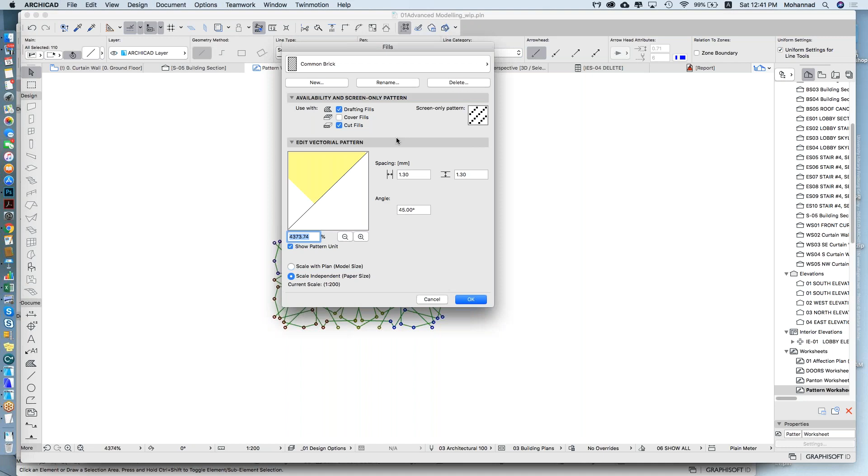Okay, in element attributes, we just go to fills, and I'll create a new fill. So maybe I'll pick one of the symbol fills, any, it doesn't matter really. Let's say this, and I will duplicate it, and I'll call it, again, let's call it delete 1 or something. And here, basically, I'll just paste that pattern. So now I have just created a new fill based on this pattern, and I'll just say OK.

So first of all, before we carry on, I just want to show you that now it's a new fill called delete that will have that pattern. And I can now assign it to a surface. So I can go here, instead of having no hatch, I'll say assign this hatch to it. So now I know that I have this texture in 3D, and also in a section or elevation I'll be able to see that as part of it.

So imagine if I have to model this in 3D, how many hundreds of thousands of polygons, and now it's just 6 polygons. And the last thing you might consider is that you might need to move this pattern or realign it. For that, you can always use the option, sorry, I forgot where it is. It's Align 3D Texture, in Document, Creative Imaging, Align 3D Texture. And then if I click Set Origin, wherever I click, that point will be the origin of this pattern, and that affects 2D and 3D.

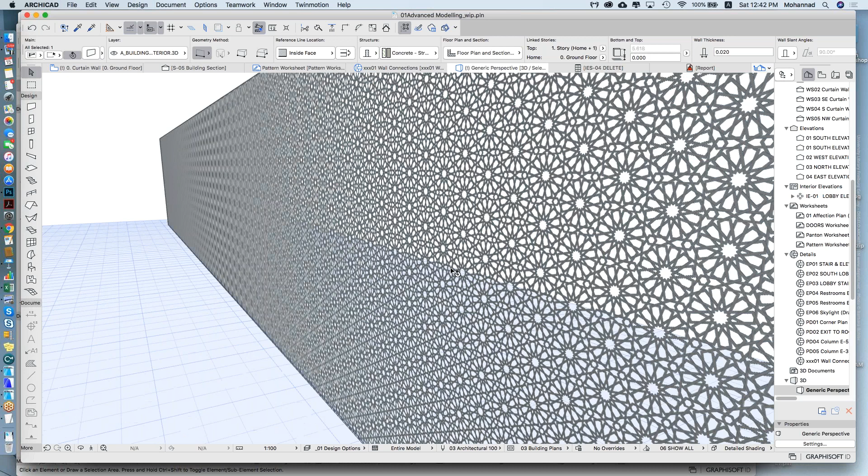So I think this is a good tool, especially for these examples where it's just the shape and you don't want to overdo it. It does actually. It reads the transparency, yes. Let's try it actually, it's a good question. In rendering, definitely it works, I'm sure of that, but I was just checking 3D. Apparently it doesn't. Rendering definitely works, that's out of question, but if it's not working here, it will not do that.

But since you mentioned 3D, one thing to consider in the surfaces: we created this material and edited it in OpenGL and so on, but now if I render it, it will still read the old values. So before rendering, when you switch to CineRender by Maxon, you have an option that says update from basic. That will carry over the same settings, and then you can have shadows and all of that.

It's a wall. There's no parts of it. It's just a wall, and that's why I'm not saying that you need to use this everywhere, but when it's not about the detail, it's a very simple thing, like a screening on a facade or a handrail. It's just a pattern that you don't need to include in your design, but you want it to show properly, so maybe you can use that.

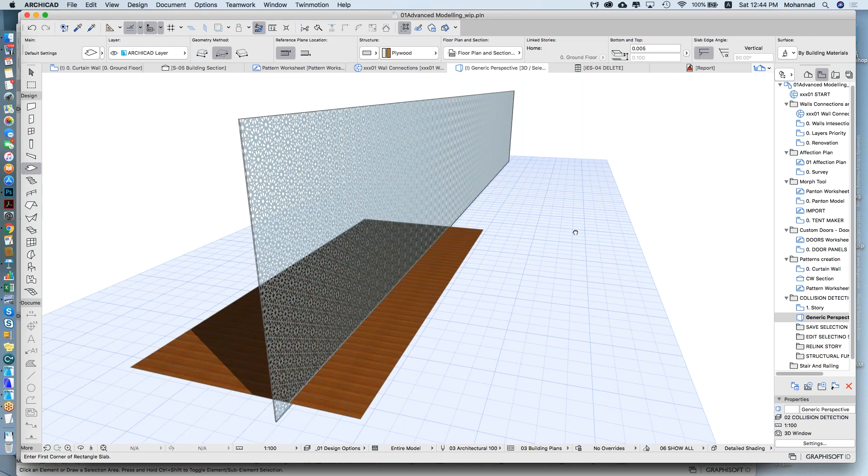A few small things I will cover before we move to the last part. Actually, there's one major thing to show first: collision detection. So let's look at it here. In this model we had just a quick MEP duct. ArchiCAD comes with collision detection by default. How does it work? It's in Design, Collision Detection. Basically, you identify two groups, and then you run them against each other.

So in this example, looking at MEP, in the first one I said check all 3D elements whose classification is a branch of MEP element. So it doesn't matter if it's a bend, an equipment, or a run. And run it against everything, in this case except zones, that is not MEP. But you can run specific elements, so if I want to check columns versus slabs, we can specify that.

Yeah, I mean, you can, as long as you can specify a group. So you can say a group, the first one, as I said, let's say in a specific layer or a specific system against the other system, you can run that. It doesn't matter, as long as you can identify them as two groups.

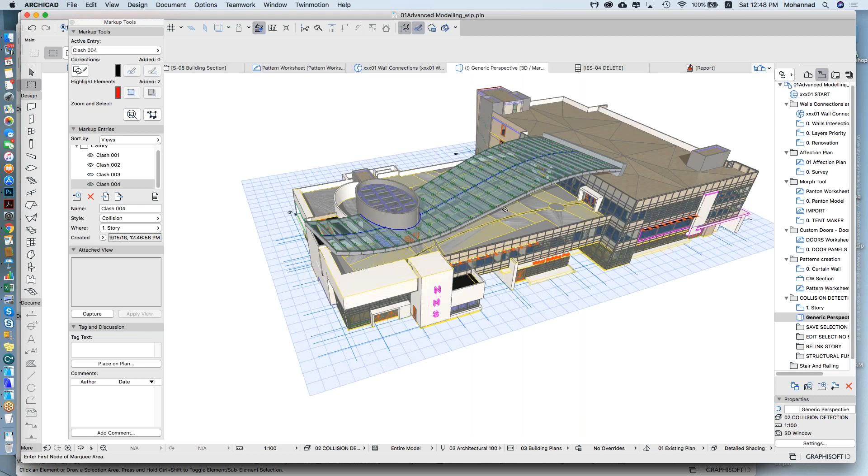Okay, so let's say I want to check this first clash. So I select them, and then I select to zoom to them. So it zoomed in, but I might have some elements in the way, so I'm not able to see it. So I think a quick, good use is utilizing graphical override. So in graphical override, I can create,

so in collision, let's say I created one rule that says everything is transparent and gray. So see here, all the types are glass and they're gray. And if I activate this, I think I did activate, okay. So basically everything is gray except for the markups that I'm turning on. So it makes it very clear to see the issue. So you can just zoom in, see the issue. And that also works in plan.

So let's say if I go back to the floor plan, I want to check them quickly. I can do the same thing. So except for the topic that I am highlighting, everything else is gray. So it's a good tool to keep up with, to see, and so on. I will remove now these clashes, and I will run the collision again. But one thing to mention, I will change the tolerance.

So basically what the tolerance does, we can either do it by volume or by surface. Basically that's a threshold. So I say any collision equal to or bigger than this, list it. But let's say I'm not interested in very minor collisions. That's not the thing for me. So I can change that. So in this case, let's say for surfaces, 0.5 meter, don't consider it, and check again. So now, for example, I have 3 instead of 4. So one of them was in this range.

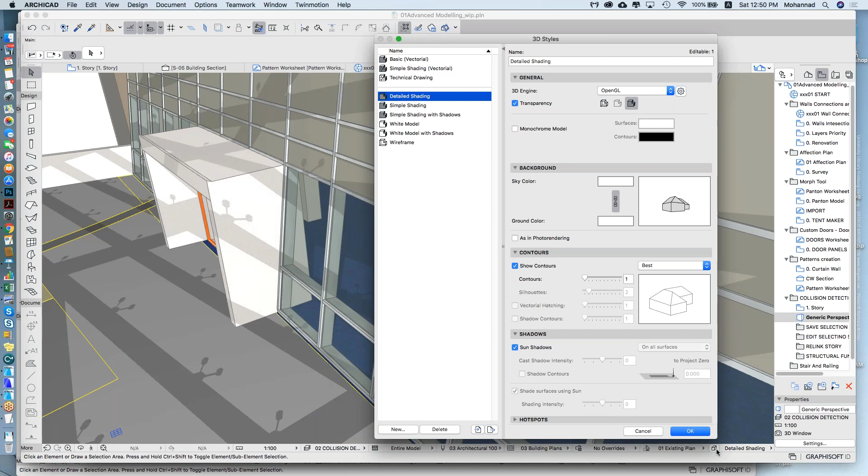A couple more things that I want to show you, small things, but I think they're good to share. Sometimes we're working in 3D and we select elements, but we're not able to find them in 2D, or the other way around. So I think a good practice. Let's turn off the shadows. So let's say for whatever reason in 3D I want these elements to be selected.

Let's go maybe to the entrance. So let's say I want this side, this wall, this, let's say this, and this wall. For whatever reason, I want them to be selected.

So it's hard to find them because they're on different floors, and I can find them here, but I can't find them in the floor plan. So you have in palettes a palette called Selection, and you can add selections to that palette and name them. So I'll just create a new selection set, and I call it whatever, one set.

Now this is selected. I can go back to the plan, let's say, and I can activate this, even though I have them on different floors. I'm on the 2nd floor or 1st floor, but I can select. So it will select them all although they're on different floors. And if I move them or change anything, it will change them all, even if they're on different floors.

So that is good also when you're working in, let's say, 3D. Yeah, so you can see that it moved that and so on. So this selection set is actually helpful, especially if there are items that you want to check, but you're not sure where they are. That's a good thing.

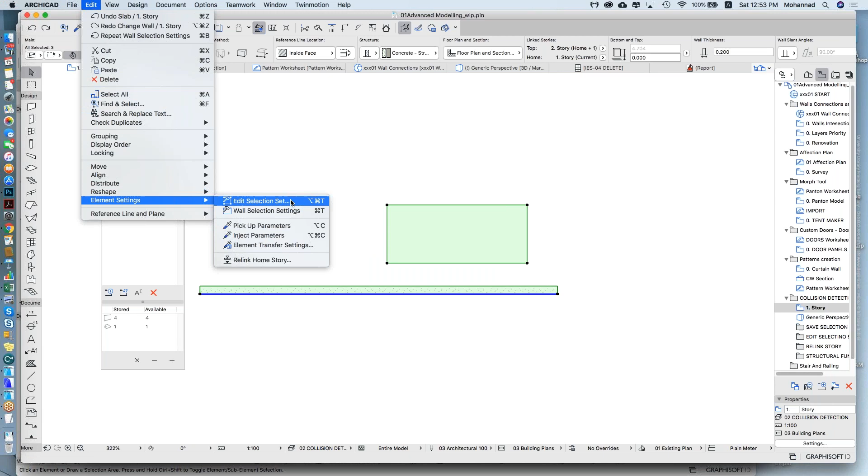To avoid that, you can select them all and use something called Edit Selection Set, which is basically, instead of Control-T, it's Control-Shift-T. Once you hit it, it will tell you, okay, you have selected these elements, and you can change these things for them. I want them all to change the layer, the structural function, the classification, all in one go instead of doing it per tool.

Showing this in 3D, the wall and slab and the column, and make them hidden? You should be able to. I don't see why you shouldn't. It works. 2D, 3D doesn't matter. Now I open the specification of the wall and make it hidden. Maybe the wall and the slab also hidden. No, the default one, because you're doing this just for this tool. So whatever was last selected, we'll usually just be applying it to that tool. Okay.

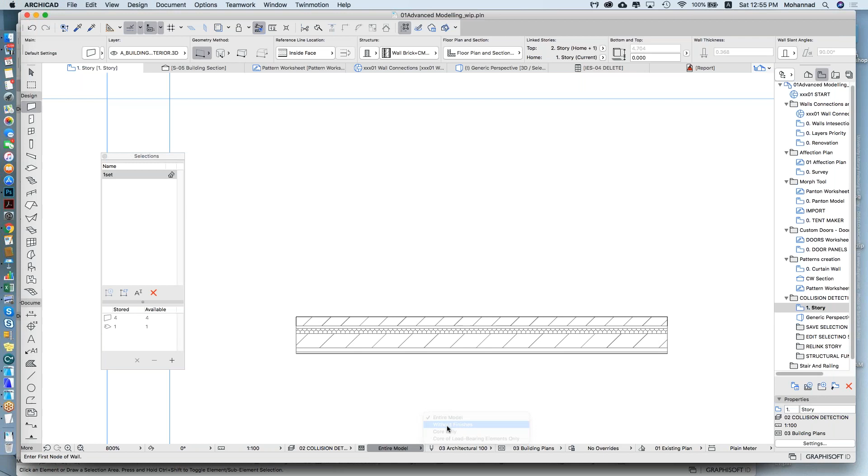One other small thing that I think is also helpful in ArchiCAD. So you know that when we draw elements, let's say a complex wall or slab, we have the skins. They're tagged differently, so something is tagged as core and so on. And we have the partial structure display. If I move to without finishes, finishes are gone. If I go to core only, only the core of the element is shown. There's also an option called core of load-bearing elements.

So any element in ArchiCAD has something called structural function, which can be load-bearing, non-load-bearing, or undefined. So it is good practice to select the actual structural elements and assign them as load-bearing, because of what that allows you to do. Let's say I'm looking at this model here in 3D.

Without worrying about what layer or what tool, it doesn't matter, we can just switch to core of load-bearing elements only, and I'll only be able to see the elements that are assigned as structural elements. So all of these are actually assigned as load-bearing elements. So we can do that. Now, we can also combine this as we did earlier with the.

Let's do it. Actually, I don't have it ready, so let's do it. We can combine this if we want visually. So I can just go here and say, well, show the entire model. And in graphical override, I can create one. Let's say we create a structural check. Okay, let's say structural check.

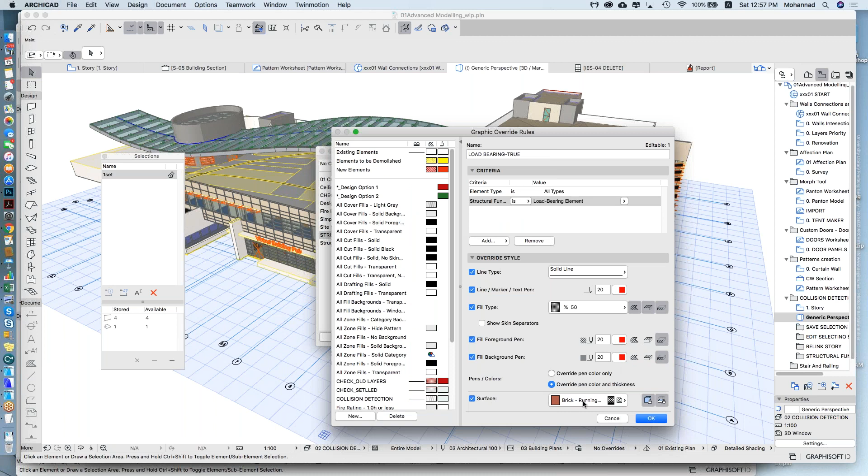Then in this case, everything whose structural function is load bearing, I want it to be, let's say, highlighted. I want it to be red, and I want it to have a hatch that is also red, and also in 3D, I want it to have some color. And then I will add this. Just be sure that's on top.

Okay. So now I have the structural check, and if I activate it, I should be able to see the whole model, where the architectural elements are all transparent, and then the structural elements. And again, it could be not based on structure, it could be anything you can think of. And that works in 2D and in 3D, the same thing. So if I activate this here.

These structural members, are they the original members like I sections, IPE sections, or is it only a physical representation? No, no. The quantities as well. Yes, absolutely. Sorry, let me just finish this and I'll show you in a second. That in plans, so we can have the same sort of relation.

I want to mention that in ArchiCAD it has actually the standard steel library. I'm just trying to find where it is. I cannot remember. Yeah, here. So for example, you can import standard steel profiles. It has them in the library, and you can import them here. So basically, based on the code, you select and you import it.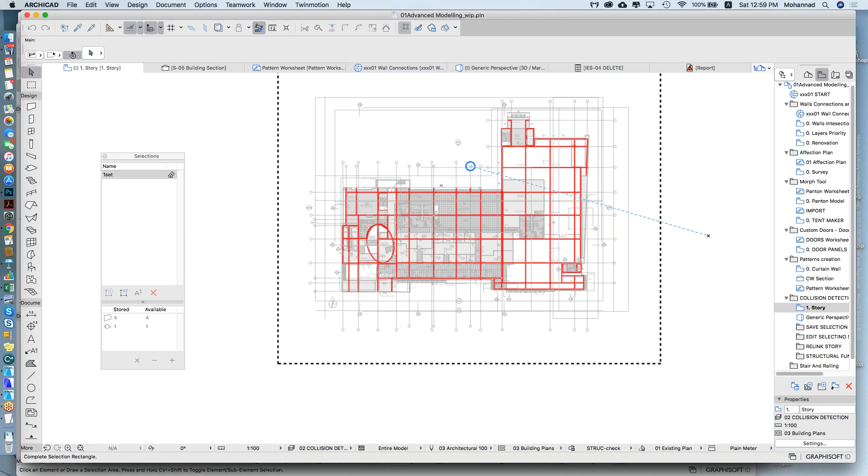In some cases, we draw an element, could be anything, but it's not on the correct floor. Maybe in 3D it is fine, but we dragged it and we end up with the home story being wrong. Or not wrong, I want to force it to be considered on another story, maybe an element that is slightly below the level, but I want it to be considered with that one.

Now, if I select an element and change the home story of this, instead of 2, I'll go to 1. What will happen is it will jump down based on the relation to the floor. This says from floor, it's 0. So when I change this, it will jump down. Now, if I don't want this, I just want to relink it, I don't want to move it.

For any element, we can just right-click, and there's an option that says relink home story. Relinking home story means it will remain in its position, it's just associated with that story. So now if I check the settings here, the home story is 1, not 2 anymore, but it didn't change the height and so on. So that I find handy. That's it for this topic.

I'll move on and show a couple of things about stairs and railings. But before we go there, any questions so far? No, we're okay.

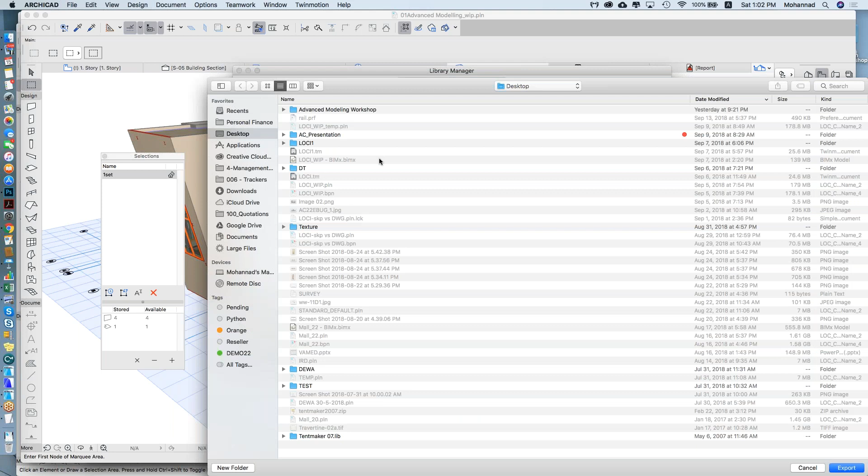Now, if it's a favorite that you have in a file, but you want to move it to another file, in favorites you have an option to import and export. You don't need to export, actually. If it's an ArchiCAD file, you can just import your favorites directly from another ArchiCAD file.

If it's an attribute, as in custom profiles or a custom pen set, you would use Attribute Manager. So in Attribute Manager, I can open another file here, let's say this file, and then I can start importing. So I just select and append or index. So I move from one file to the other. It could be a profile, it could be anything.

Okay, so I think I'll move to the other example. I'll try to cover a couple of things about stairs and railings. I'll show two examples, and then a few small things. So the first example is creating a stair that also incorporates some furniture. I have the environment ready.

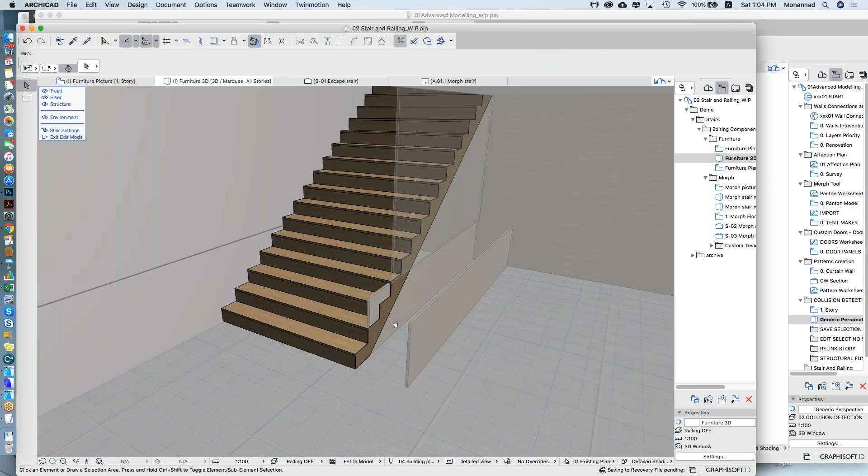I'll just pick the stair tool, draw a stair, and align it with this end here. So let's say we have a stair. Now, once we have a stair, we can start editing the sub elements. So I can select this tread here and say this should be extended here. This should be extended here, and the last one extended here again. And then the risers, I can start adjusting them.

And we can even create shapes. So if I want this to be curved, I can just select and curve it a little bit. Or let's first stretch this and then curve it, it'll be easier to control. So we do this, and then we curve this, and this should be curved with it. And this part, I'll create a node here, and then stretch it all the way to the back.

And then, using solid element operations, I can clean this up. So I go to solid element operations, use these as targets, use the stair as operator, and execute. So I have this, and it's an actual stair, so you can control the steps and everything about it.

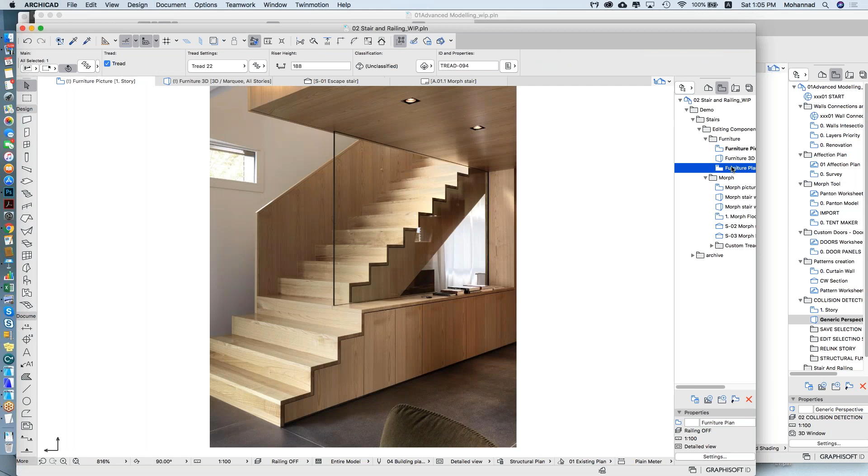But let's also show if we want to add a railing. So in railing, maybe I'll select wired railing, and apply the railing here. But I want to edit that, so I'll select it. I don't want the whole thing, so I just want it to be up to here. And let's stretch this point back. This looks like I curved it.

Just try one thing. Okay. Because this is live, it's not working, so let's try it one last time. Okay, we can stretch it back, but let's say that's a start.

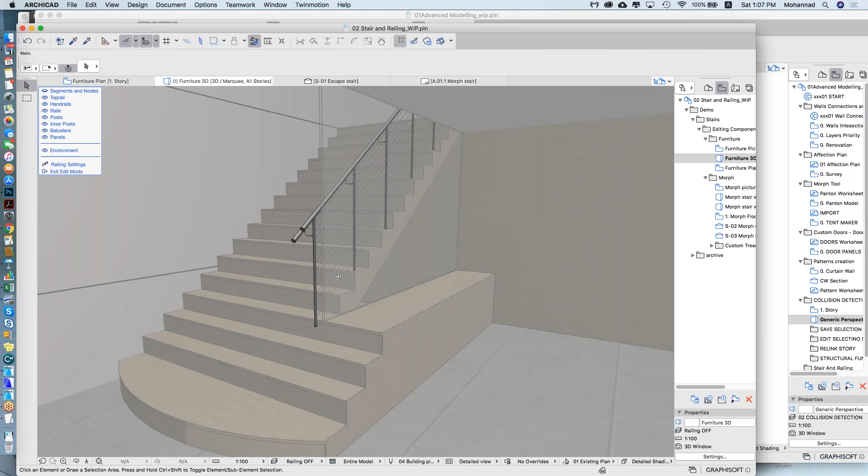What I wanted to show you is that you can also adjust the ends of it. So if I want those to be horizontal, or an extension with a return, with a curve. First of all, I can stretch it. We can work on these elements separately, and then put it back to the point that I want, and so on. So you really have a lot of options to work on it.

Or let's say, in this case, we will just place one to the wall. So in this case, I'll just place it here, and by default it's pushed up. First of all, I noticed that it should be flipped, so this should be on the inside. So I'll just use the flip railing on reference line. So it is flipped, and then I can start editing it.

So I can just go to settings, and in segments I'll start removing the rails. So many rails here, so I'll just remove them. Okay, and then maybe the top rail, we will remove it, and also the posts. Let's say we don't want inner post, and maybe even... let's keep it actually for now and see how it looks. But let's say also I don't want these posts, so I can select them and turn them to none.

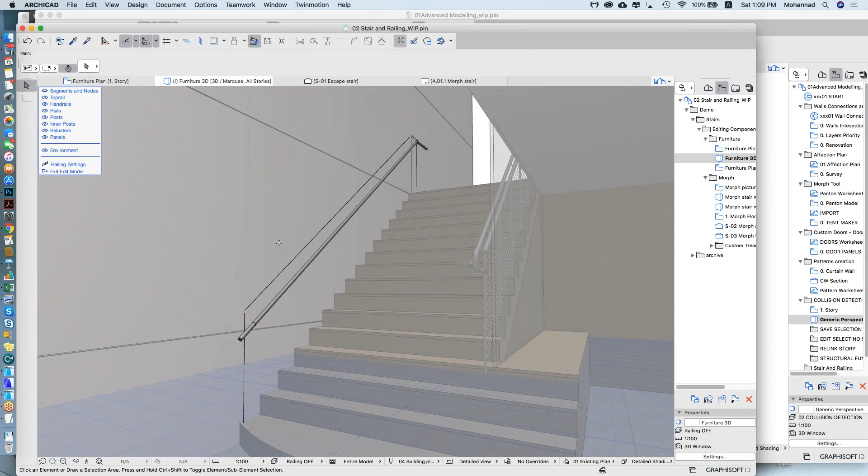So there's no posts, and let's say we want to add fixing for this to the wall, so I can just go to settings. And in settings, I will find a fixing option, and I'll say I want the plate, I want the details. You can control all the details here, and then the distribution. So let's say I want to distribute it by a number, so I want 6 or 8 or whatever. And it goes with the fixing.

And again, the same thing, we can control these handrails and so on. So we can control all of these in it. I think it's a small thing, but it just shows how powerful this tool is and the options that we can do with it. So that is one quick example of editing sub-elements and so on.

Another example is about creating custom treads or custom stairs. So this is a stair that's created with Morph. So we'll see how we create that. We started with a basic stair, and basically I can just go to edit. And just to clarify, this stair in settings doesn't have a structure. So there's no structure required. There's just the treads, because there's no risers. So we have this shape.

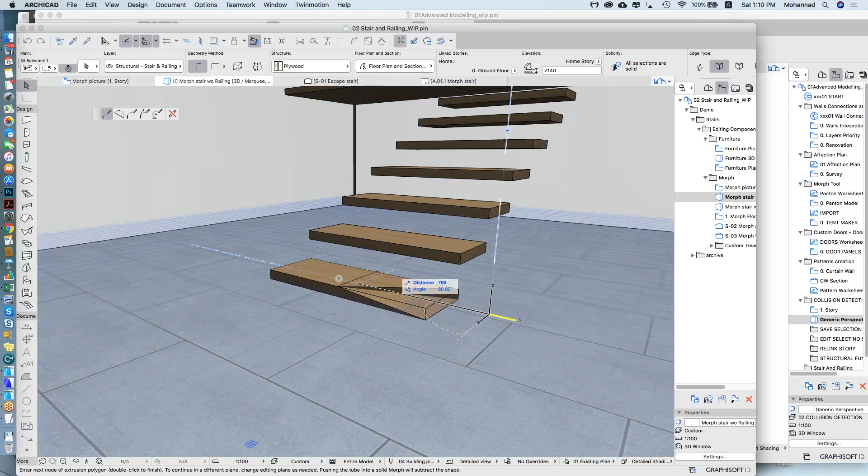And then let's say we go to edit, and I can select this as a start, and I can convert it to a morph. Now, when I convert it to a morph, it's not part of the stair anymore. So it's just a morph, and I can start working on it. So I can, using whatever we showed earlier, do this. Okay. So let's say up to here, and then if I want an edge to be curved, it's a normal command for the morph. So we can also do the same thing here.

Whatever shape. Now, once we are done, we can select this and save it via libraries and objects, save selection as, and we will save it as a tread. So here, stair tread. Give it a name, test, and no, let's try it again. Well, there's a step missing, because it's not getting saved. I'm not sure why, but when you save it, it'll just ask you for direction. We'll try it again later; I think we'll just open a new file.

But basically what happens after that, so I can delete this, is if I select, because now we don't have this here, I can turn on the tread, and I will have it saved here. So I have those steps saved already, so I can just select them. So this is the first one. Let's assume that each one of them we've created and saved individually, because those are not repetitive. So I'll just apply them here one by one.

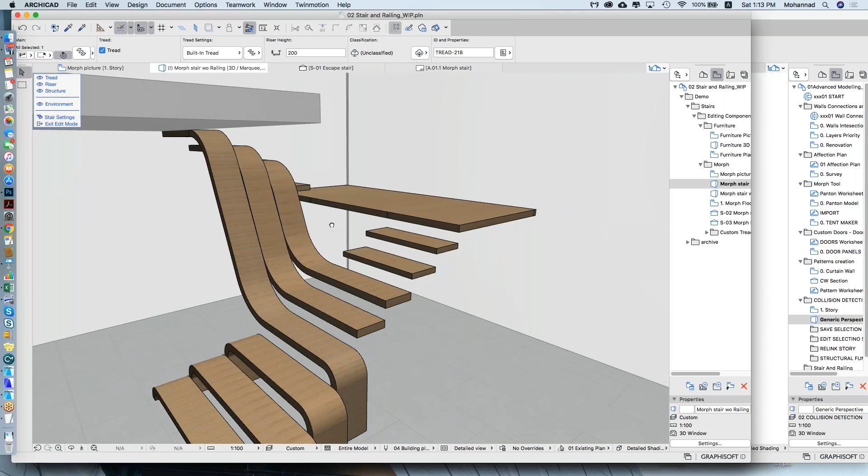So that is 3, that is 4. You see 4, for example, is connecting with the upper one. So this is 4, and this is 5, and this is 6, and so on. So we're almost done. So this is 7, and this is 8. So those were saved earlier.

So basically now this is one stair where we have these shapes, and with a little bit of work on the details, like adding railing and so on, we can have that. And you can have a look maybe at the sheet. So that is the stair, how we create it, and it's actually a stair. It's not just a morph, it's an actual stair that follows the concept. So basically what I want to show is you can create custom treads. It doesn't matter what the shape is, and you can apply it. Another quick thing related to it, so I'll just start a new file.

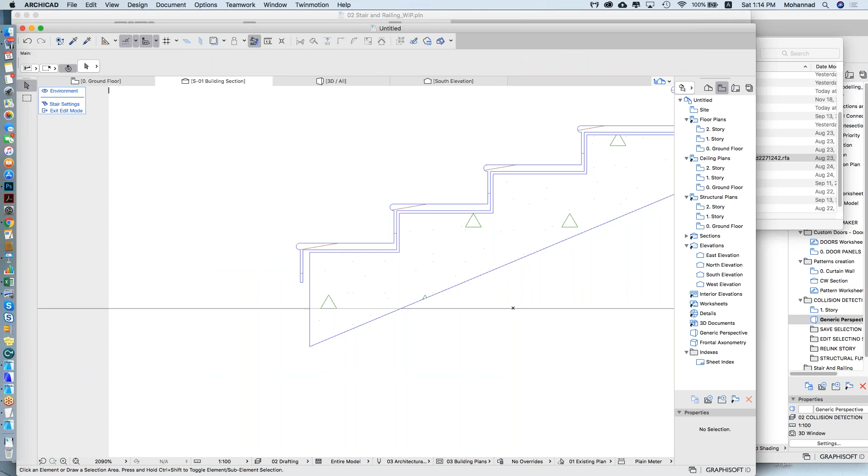So also related to stairs, let's draw a very basic stair. Doesn't matter. It's just one thing to show about stairs. I hope you're familiar with creating stairs, that you set the rules and you can control the heights and so on. But after that, if I open a section, in some cases we have one step that has a different height, and we can also adjust this.

So if we want, obviously, if you don't want to kill the people going up and down the stairs, don't do it, but you can. I want to highlight that you can do this one by one. The other thing that I also wanted to highlight is

Sajid asked recently, he wanted to have a specific profile, not empty. He wanted to have some hatching or some concrete or something below it. So first of all, you can use the custom tread, but the custom tread will not adjust to the stairs, like the size, the shape. But what you can use instead

But in that case, I would modify the starter and the ending treads and values. I have to make a separate profile for the starter and the terminal. Right. No. The problem was when I'm creating a section, for some section it looks okay, but if you see that in elevation or from side view, it shows the material in the side view as well. Then just override the sides, you should be fine. But anyway, let me cover that.

So the first method that we showed is creating a whole step with the design, but you can also create a profile. So in Profile Manager, I think there is one that we can use. Yeah, this is reasonable. So you can draw a profile for your design. Let's say if I have this, and then I'll add a different material below it, or a different design. You want a groove in the stair.

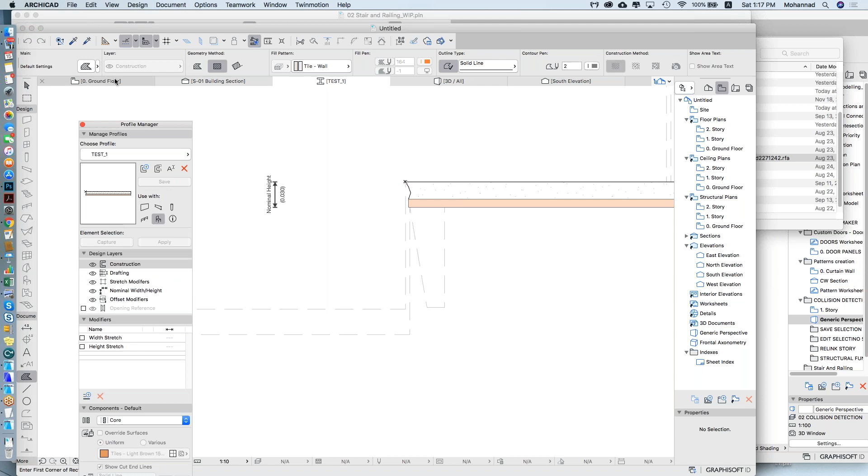Yeah, so let's say this, or you have a specific shape. It has a groove at one point. Any shape that you can think of. And basically, once we save that, then you can assign it to the stair. So if I go back to the stair, obviously I would recommend that you start from the stair section, but it's okay.

You can go to settings, or actually you can just directly go here to treads, and then here in tread you can select the profile, and whatever you have as a profile you can use. So I'll just use this, and for the ones that I didn't adjust, I need to adjust it. So whatever detail that we have applied here is applicable, and you can work on it.

Now regarding your question, let's check. It shows from the side view. Yeah, let's check. You should be able to override it. So let's say this. Oh yeah, you can override it. So that's also a good thing, that you're not limited. You can create whatever profile that you want and assign it to it.

I think that's pretty much what I wanted to share with you today. Yeah, I think that's it. Any questions so far? Yeah, we're good. Okay, well then I hope you found this helpful, even for heavy users that are using ArchiCAD daily. I hope you still found something that you can benefit from.